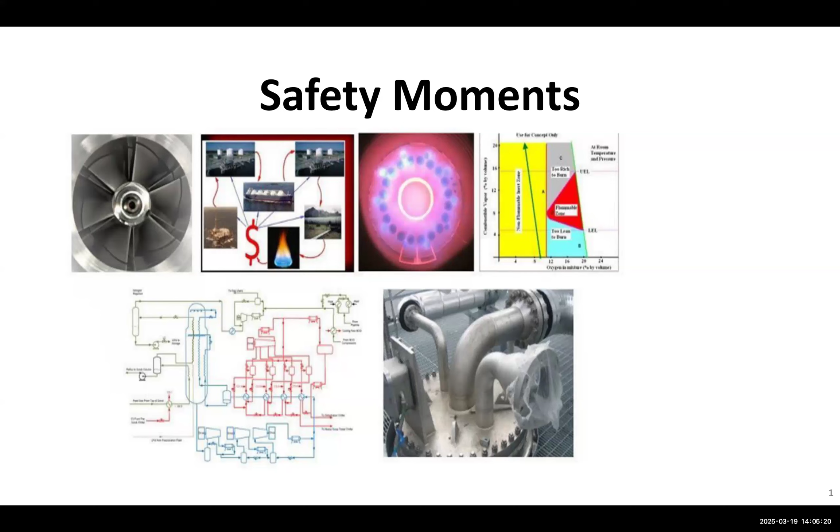But first, some of these safety moments will be strictly technical in nature, not necessarily an actual accident. Let's start off talking about ruptures.

Gas pipeline ruptures - if you look over here, you see a gas pipeline rupture that occurred in San Bruno, California. You see what happened: the pipe actually ripped apart. It didn't puncture a hole, it ripped apart and blew out of the ground. Here's another rupture that occurred in Milford, Pennsylvania - in fact, I was living in Milford at the time this occurred. If you notice, what's unique about both of these is that there's a piece of pipe missing. So what happens in a rupture is that the pipe blows out of the ground, literally ruptures to the point where there's a section of pipe missing, and you have gas flowing into the break from 2 different locations.

Now, remember when I told you about not engaging the brain before your actions? One of the things I forgot to tell you is what I did early on. Right after those two accidents happened, I came across a location where a gas main was ripped out of the ground. It was only 2 inches in diameter, and the gas was blowing. I jumped into the opening, wrapped a rag around a stick, and stuffed the stick into the pipe. Immediately, the gas pressure built up behind the stick, and the rag, the stick, and myself got thrown across the trench. I climbed out. Now, this is where I say engage the brain before taking your foot off the clutch - before I jumped into that trench, there was nobody in the trench.

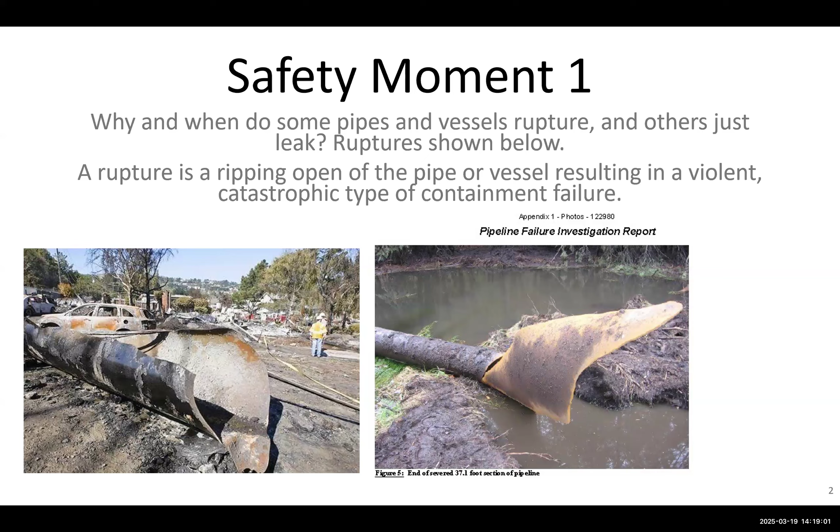So does the PIR, the potential impact radius, really define the area of consequence? No, and here's why. You know what I forgot to do? I forgot to set my timer, so I'm going to have to keep moving along—I just set it now. So what's happened is the potential impact radius is going to be

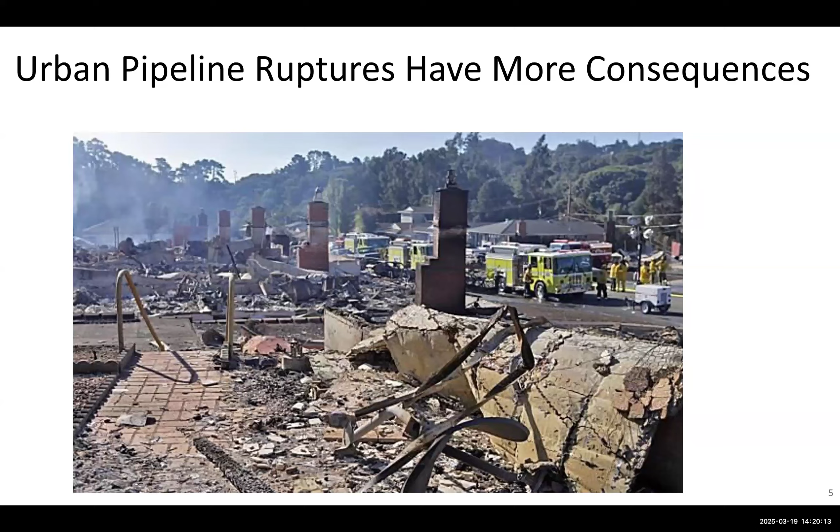Well, let's move on. This is what happens in an urban area, and this is what happened in the San Bruno area. Next, I'm going to look at stratification.

I don't know why it's not showing here—this slide is not showing properly. There it is, okay. Safety moment number two is stratification. What is stratification? Stratification is when layers of LNG lay on top of each other. Like here, you see a layer of LNG.

This is heavy LNG. Typically when I ask a class, where would you put heavy LNG if you had a dense LNG come into your plant and you need to store it, and you have light LNG in your tank, maybe 75% of the time students or learners will say you put it on the bottom—you always put the heavy stuff on the bottom. Just the opposite: put the heavy stuff on top.

Why? So that the heavy LNG mixes through the light LNG, and then you have a homogeneous mixture. If you put heavy LNG on the bottom, let's take a look at what happens: it stays on the bottom. And what's so bad about that? Well, it stays and it circulates within itself like this.

Why does it circulate like this? You have heat coming in, which makes it light and buoyant—it goes up and goes around, but it can't push through this very light layer of LNG. So what happens as it stays and circulates in here? There's no cooling taking place, so it gets hotter and hotter and hotter.

What happens to the top layer? Well, it evaporates on top, so it stays cold at its very cold temperature. Let's say this is minus 256 degrees Fahrenheit, and the bottom layer goes from minus 256, minus 254, minus 250, minus 248, minus 246. What's happening as it's getting warmer? It's expanding. And what's happening to its density? It's getting less and less—so the bottom layer is getting less and less dense.

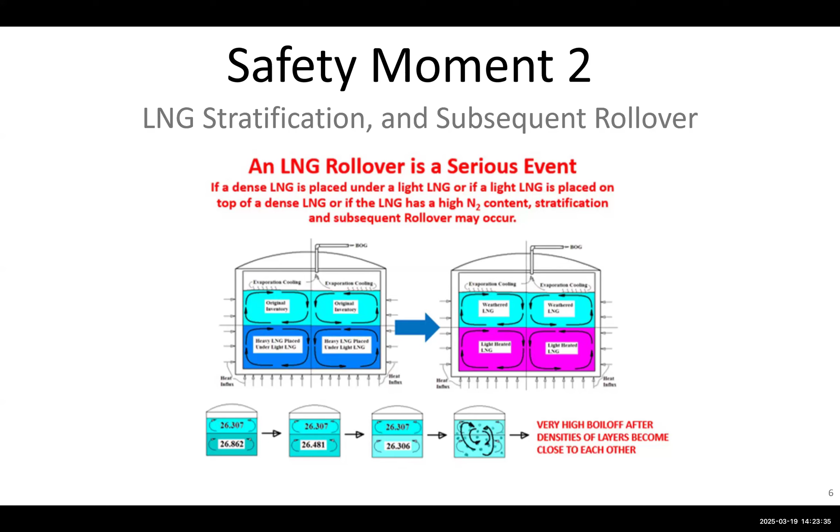Why does LNG stratify? There's two basic reasons. One is fill-induced stratification, as I just showed you - we put a heavy LNG under a light LNG. The same could happen if you put a light LNG on top of a heavy LNG. Another mechanism, which we won't have time to really discuss, is that nitrogen can cause LNG to auto-stratify. There's another form where the bottom layer is due to fill induced, but that layer has nitrogen, and all of a sudden it starts boiling before it even gets lighter than the top layer. Think about it - if it starts boiling, it's got bubbles inside of it. It's going to puncture through that top layer and start a rollover.

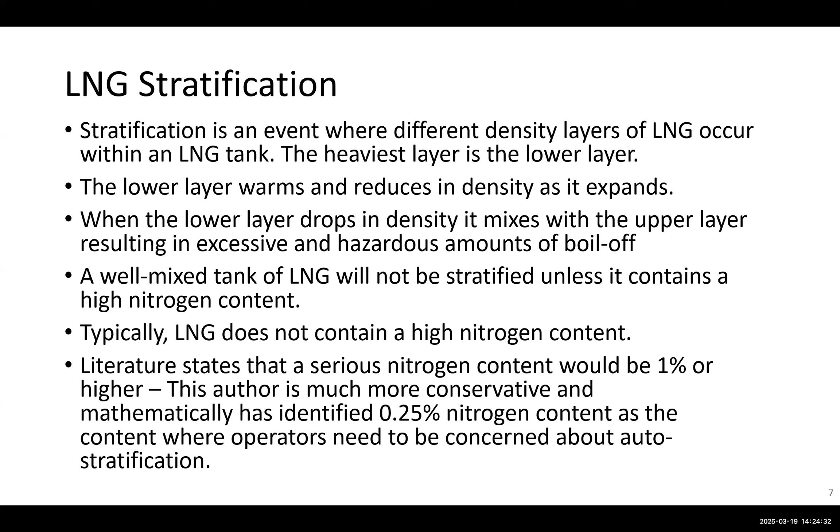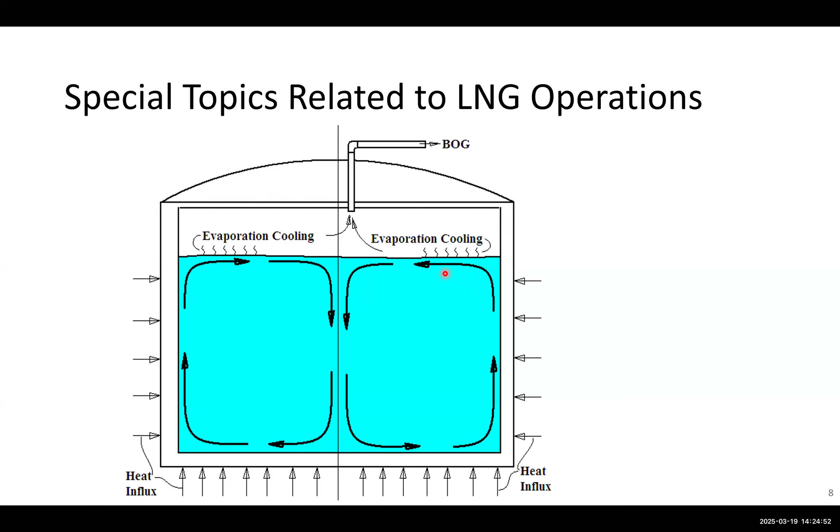So I was called out to a location where the plant had a rollover condition. This plant happened to at the time have 5 tanks, and they couldn't understand what happened. The relief valves vented, and they called me, and I looked at the temperature and density profiles, and I was able to say, yep, here's what happened. You had a rollover. Now, what happened there in that particular case is the superintendent knew that he had a stratification, so he pumped out the bottom layer, and that's how you get rid of a stratification.

You pump out the bottom layer to the top of another tank. This way it goes through, assuming that the density of that other tank is lighter than this bottom layer, it goes through that top layer and it mixes. But this plant had been so much in a mindset - you always bottom fill, because bottom fill produces less boil off. You always bottom fill. So he took the heavy layer from one tank and put it underneath another tank. All he did was transfer the stratification from one tank to another, and immediately thereafter, they had the rollover.

The next safety moment we're going to talk about is LNG tanks or pipes can BLEVE. Now, when we think about BLEVE, we typically think about a propane tank and a fire, because that's the most typical type of BLEVE. What happens in that case: a propane tank may be on fire, and this upper portion of the tank gets heated by the fire. The bottom portion doesn't get heated because it has liquid in it, so the liquid is drawing that heat away very quickly. The top of it goes above 800 degrees Fahrenheit, becomes weakened, eventually blows out, and all of this high pressure liquid that's at saturation temperature, because it's boiling, now blows out of here and atomizes into a big vapor cloud.

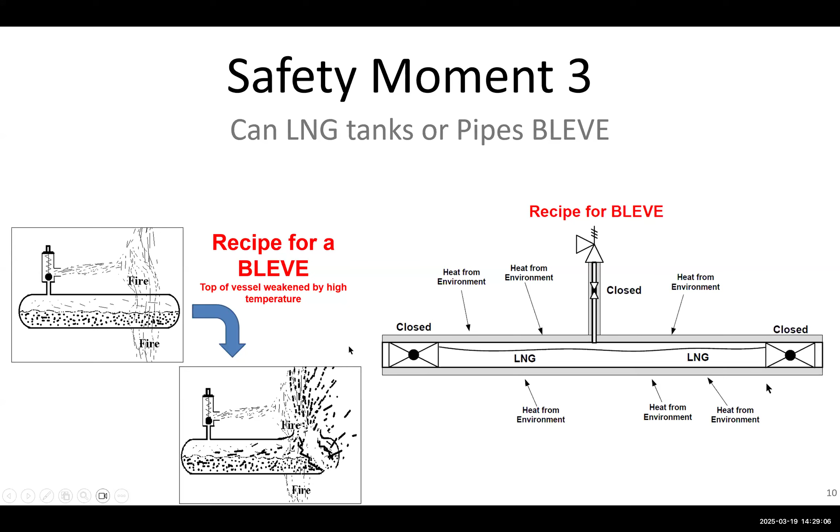Typically, just the BLEVE itself, before any secondary explosion, has enough power to rip out piping and other equipment at the plant. And what would happen is, if this is a flammable liquid, which LNG is, it would take out electrical connections, etc., which becomes a source of ignition, and then you end up with a BLEVE—boiling liquid expanding vapor explosion is what it's called.

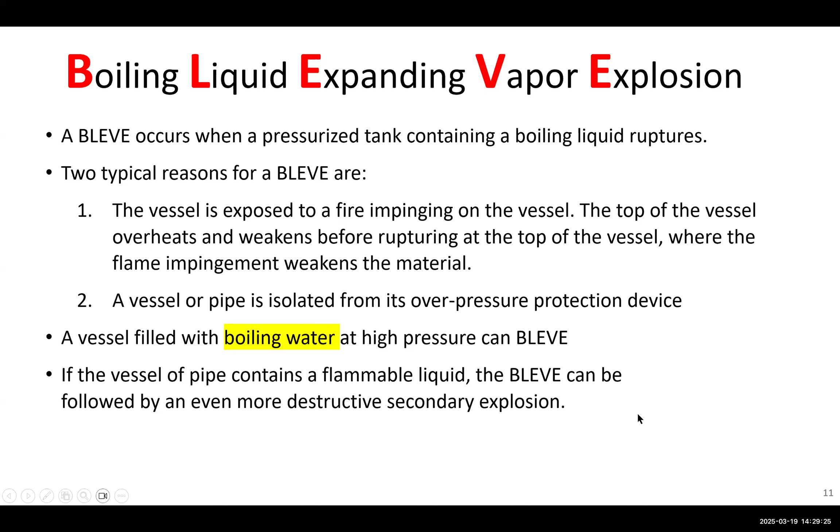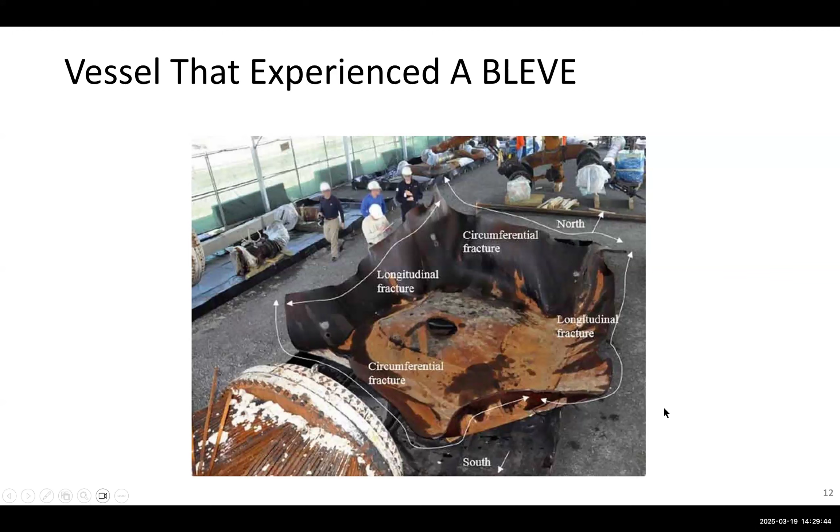A steam vessel can BLEVE, but a steam vessel does not have a secondary explosion. That doesn't mean it can't be a violent explosion—it can be a violent explosion, but it's even more violent when you have a hydrocarbon in that vessel. This is a picture of a vessel that BLEVE'd. This was a reboiler, and you can see here the reboiler tubes. This was the outer shell of that reboiler, and it's shown in the next safety moment even more vividly. But this is a vessel that was once circular that BLEVE'd—it ripped apart.

Characteristics of a BLEVE: rapid pressure release. It can produce a shock wave. And the secondary fireball, if it happens to be a flammable liquid that's in the container, can also have a shock wave—may or may not have a shock wave, depending upon the conditions of the material that's exploding. Flying debris is another thing—flying debris certainly rips out many parts of other pieces of equipment or other fuel-carrying piping, etc. So flying debris is a major concern.

In fact, when I talked about rupture earlier, I didn't mention one of the things not taken into account in the calculations of the heat transfer or the hazard: the amount of earth and debris that gets blown out of an opening. The initial blast of a pipeline rupture has four times the amount of gas flow than the final steady-state blowing, because in the final steady state, all the pressure is down and it's just being fed by the pipeline's continuous flow of gas. But that initial pressure energy is not counted as part of the hazard associated with it.

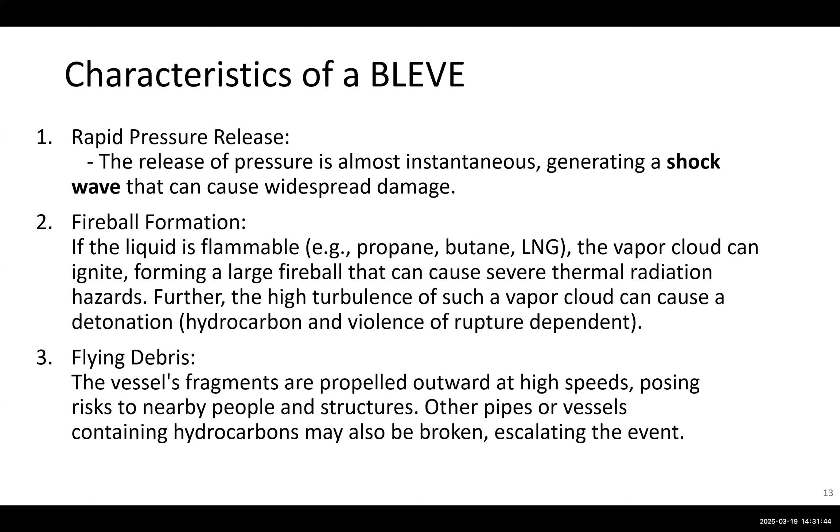In fact, one of the ruptures that occurred in Edison, New Jersey, blew a crater in the ground. Think about the numbers: 140 feet long by 65 feet wide by 14 feet deep. Think of the amount of earth, rock, asphalt, and everything else that was blown out of that opening. That's very significant. So with a BLEVE, you also get a lot of shrapnel associated with it. Many times, shrapnel will be found a quarter mile to a half mile away from the BLEVE, because it has that much energy.

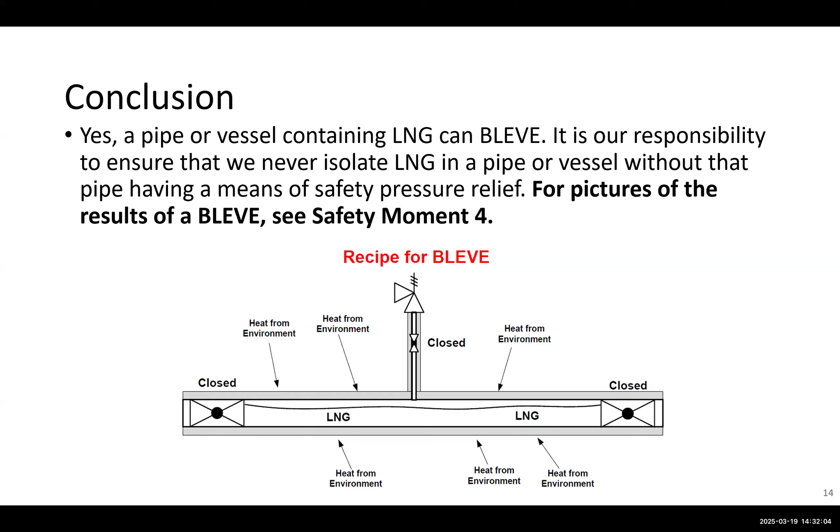Conclusion: yes, pipes and LNG vessels can BLEVE. They typically don't, because of administrative controls, such as making sure that relief valves are always on piping and that the vessels are always protected.

Safety moment number 4 is a culture of safety, safety culture. Many times you'll go into certain plants and you'll find they're not inhabiting a culture of safety. One of the things that the CSB, Chemical Safety Board, did was make a video. It's 55 minutes and it is worth your time to review it. It's called The Anatomy of a Disaster; I called it Anatomy of an Accident.

Prior to making this video, many of the same things that they identified, I had identified in my training, which I called Anatomy of an Accident. In this case, they called it Anatomy of a Disaster. Very worthwhile seeing it—it's 55 minutes. In that video, Professor Trevor Kletz stated, if you think safety is expensive, try an accident.

Accidents cost a lot of money, not only in damage to plants and claims for injuries, but also in the loss of your company's reputation.

I know of one plant that was completely built. It was an import terminal, an LNG import terminal. Their commissioning cargo was en route to that location. Three miles away from it, a year earlier, an LNG plant had a collapse of the roof and a fire inside while men worked inside. Forty people were killed. That plant was totally shut down, and it was dismantled.

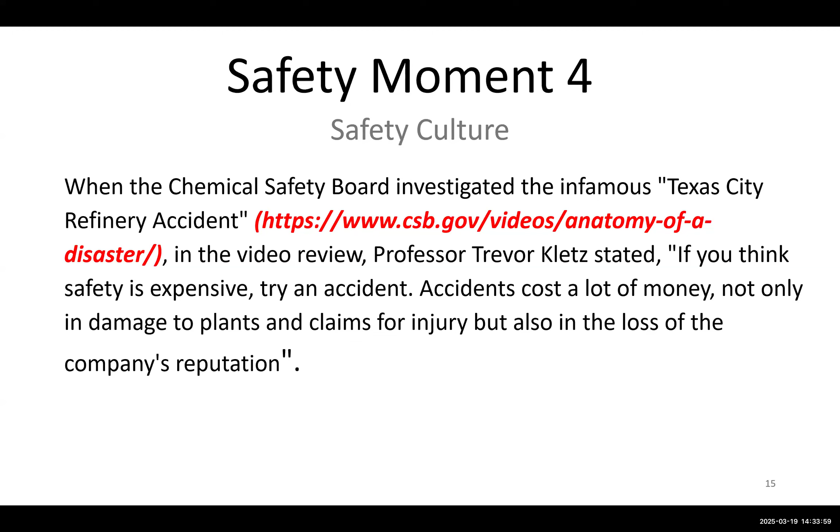But the plant that was being built, on the very week of commissioning, because the commissioning cargo was en route, their operating permit got pulled. Those tanks—I live about a mile from those tanks—never saw a drop of LNG. There were two full containment tanks.

Now, a lack of safety culture. In October 2016, a reboiler exploded in Baton Rouge, Louisiana. The accident investigation report concluded that process safety management program deficiencies at the facility during the 12 years leading to the incident allowed this heat exchanger, called a reboiler, to be unprotected and overpressurized, ultimately rupturing. The CSB investigation revealed a poor process safety culture. That was the key thing they found here.

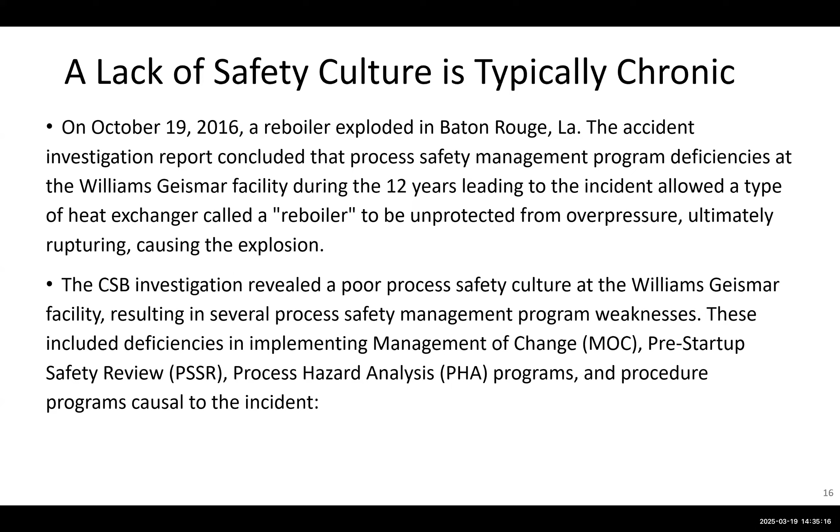Lack of management of change, lack of pre-startup safety reviews, lack of process hazard analysis, lack of procedure programs—they were very casual about how they operated the plant. The end result was a number of people being killed, and I'm looking for the number. I don't know—this isn't the one where people were killed. There's another one I'll mention where 16 people were killed. I don't think anyone was killed in this accident, but you can see the results of it.

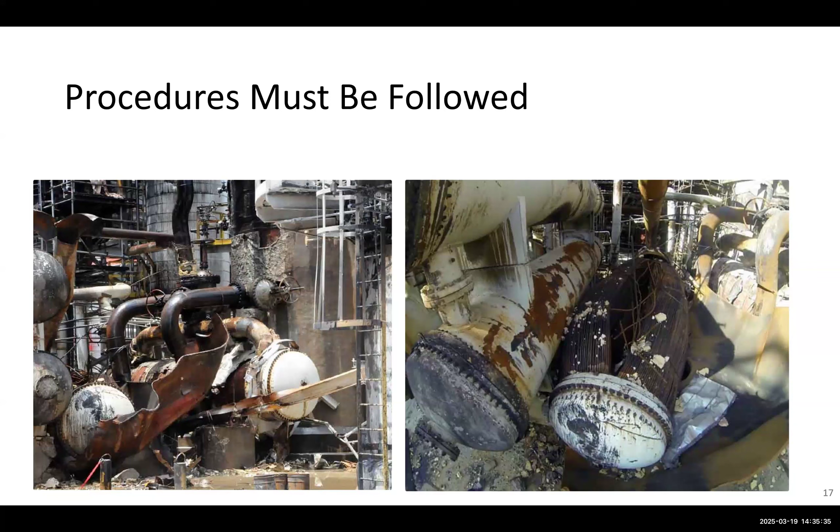You see the reboiler—this was the plate of steel you were looking at earlier that was brought inside, and this is the reboiler itself. What happened is they allowed heat to enter this reboiler. It contained propane, and the relief valve had been blocked, and the end result was this BLEVE. But the issue here was really the culture, and that's the key thing I bring up.

And I conclude this very strangely. Back in the 1600s, Elizabeth Barrett Browning wrote a poem, 'How do I love thee? Let me count the ways.' What a strange way to end a safety moment. Well, each of us—myself, yourself, your fellow employees, your coworkers, the citizens that live outside your plant—they all have someone that loves them or that they love. Everyone deserves to come home safe at the end of their shift. That's putting it in a nutshell.

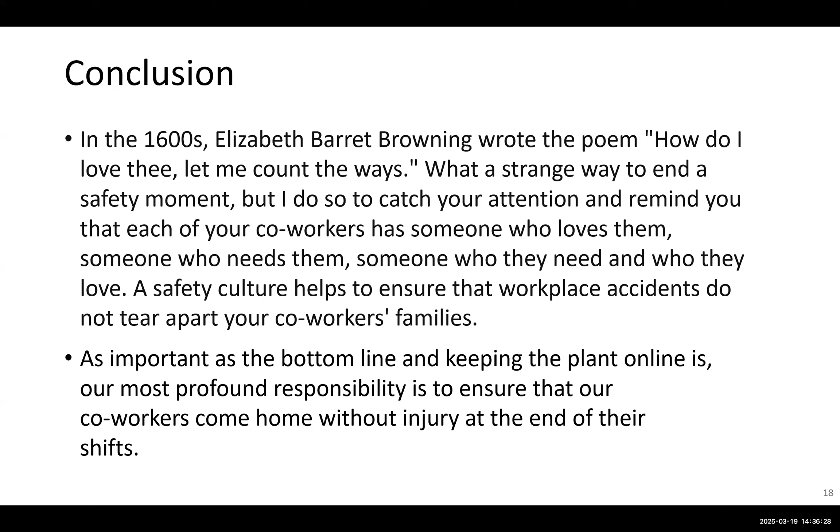And I've seen many times where I've visited people who are injured on the job and are permanently disabled. I see not only the worker injured, but the entire family has been injured.

Next, we're going to talk about the difference between deflagration and detonation. You've probably heard the word deflagration many times. Deflagration is a slow-moving flame front. Often in testing, they'll pour LNG into a pool, and someone from far away will go with a torch and light the vapor cloud, and that flame will move slowly to the pool of LNG and just continuously burn. That's called deflagration—a slow moving flame front.

Detonation, on the other hand—you've probably seen in war movies, looking down from the plane bombardier's sight, you see bombs hitting the ground. As the bomb hits, there's an explosion, but then there's a pressure wave that ripples out far away from the explosion, rippling all the way around it. That's a pressure wave, and that pressure wave is what's associated with a detonation.

A pressure wave can kill people much more so than a deflagration, because with deflagration you only have to worry about the heat. But detonation has this pressure wave that goes way beyond the heat zone of the fire. So if you look at it, 1 psi overpressure is what it's called.

Think about your body—let's say you're 72 inches high and 20 inches wide. That's 1,440 square inches being hit by a 1 pound force. That's 1,440 pounds pushing against your body instantaneously. That can cause lung damage, possibly fatal injuries, internal organ destruction, break windows, etc.

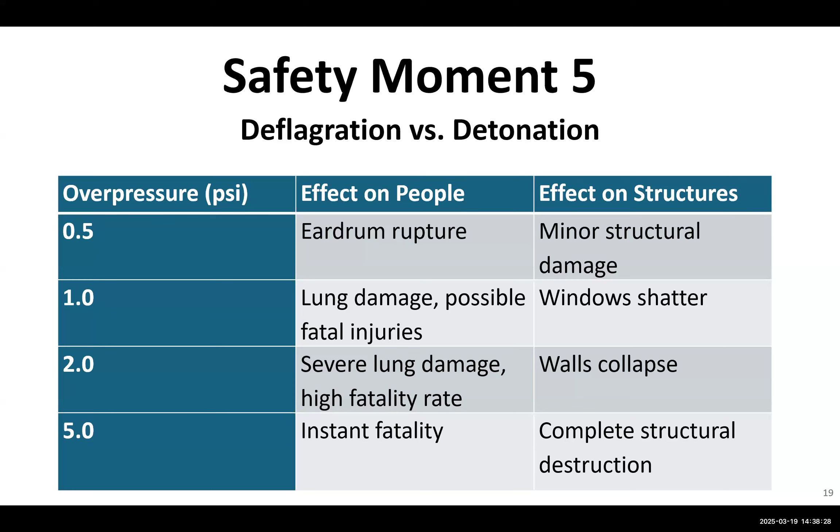At 2 psi, you have significant probability of death. At 5 psi, it's instantly fatal, with complete destruction of buildings. Contrary to many beliefs, although unusual, vapor from LNG can detonate if it's very turbulent.

I did my PhD dissertation on turbulent flows of natural gas inside engines, inside natural gas engine cylinders. If you provide enough turbulence in swirl and enough turbulence in tumble, then you can actually control the temperature and the emissions associated with that flame by increasing its turbulence.

If the flame front is extremely turbulent, you can also end up with detonation, a transition from deflagration to detonation. How does that occur? Let's say you're in a crowded pipe rack and you have a gas leak and it starts to deflagrate. As that flame moves faster and faster through the pipe rack, going around piping, it gets turbulent enough where the flame front becomes supersonic. Once you've got a supersonic flame front, you have a supersonic shock wave ahead of it, and that's where you end up with deflagration leading to detonation.

Preventing air fuel mixtures from occurring where they are not intended, that's our job. Where are they intended? Inside boilers, inside process equipment where we expect to have flames, but not in the environment of the plant proper. Preventing a BLEVE of a boiling hydrocarbon is critically important in any petrochemical plant.

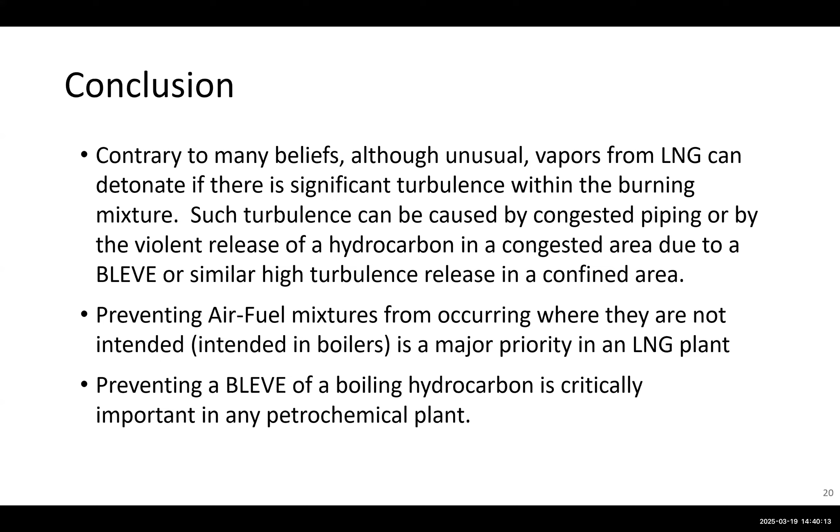Safety moment number 6: do not peel back the layers of protection. What I mean here is that everything has layers of protection when designed.

Take, for instance, your LNG tank. What if we get a leak in the LNG tank? One layer of protection is you have sensors on your tank that will warn the operator and he can take certain actions. But you're using 9% nickel steel, that's a layer of protection so that your tank can withstand that cold temperature and not crack and not become brittle. Another layer of protection is you have a dike around it. That provides, if you do have a leak, that the leak doesn't run down the street into the sewers like it did in 1944 in the Cleveland LNG spill.

Another layer of protection is you might have insulated concrete on the dike area so that if there is a spill, it produces much less boil off. You might have foam generators that put a layer of foam over the LNG. So these are all layers of protection, and you have to watch out not to remove layers of protection.

I remember one incident, part of this presentation somewhere in here, where layers of protection were removed, and eventually there was an explosion and two people were injured. A 4,000 psig CNG compressor exploded, injuring two employees. Layers of protection were breached over a period of time.

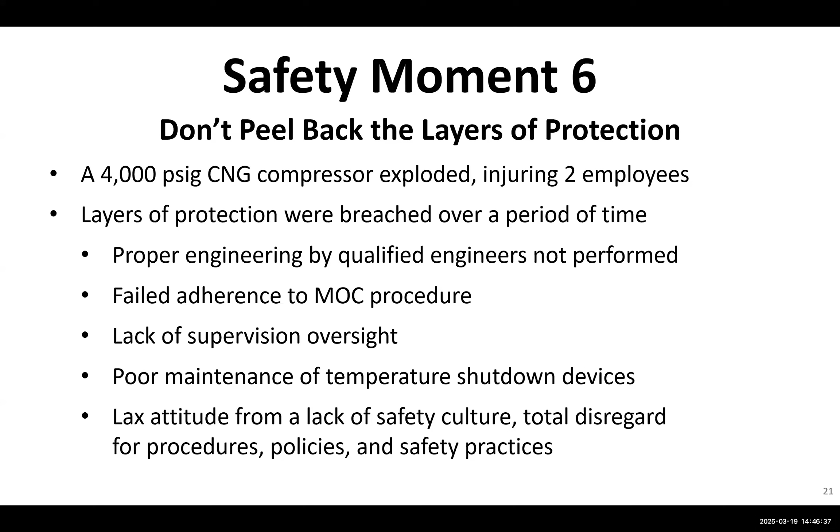The analysis showed that a failed component inside the machine caused a spark, caused a hot spot because it was metal on metal wearing, and that's what caused the explosion. It was a removal of layers of protection.

LNG on wheels - this is an interesting one because LNG has always had this big fear around it. Well, tens of thousands of trucks carry LNG every year across the United States. And you know what? They also carry gasoline and propane.

Is there a hazard of transporting LNG? Yes, there is, but it's a manageable hazard and it's an acceptable risk. It's done all the time, same as gasoline trucks, same as propane trucks. That hazard is considered acceptable, but it doesn't mean we can get lax.

The operators have to be trained, they have to be qualified, the equipment has to be inspected for being mechanically sound. In fact, when an LNG truck comes into your plant, it's your responsibility - the truck driver's too, but your responsibility - to take a walk around that truck and make sure it looks like a safe truck, which means the tires have tread, and that the air brakes look properly adjusted with the proper amount of movement.

Is the operator using chocks? Is the key taken out of the ignition while the guy is unloading or loading? Quite often what they do is put the key on a big elephant ring attached to the hose so there's no way that key can be used. But of course, people are sometimes lazy, and who stops someone from getting a second key and just using that instead of putting the elephant ring on the hose?

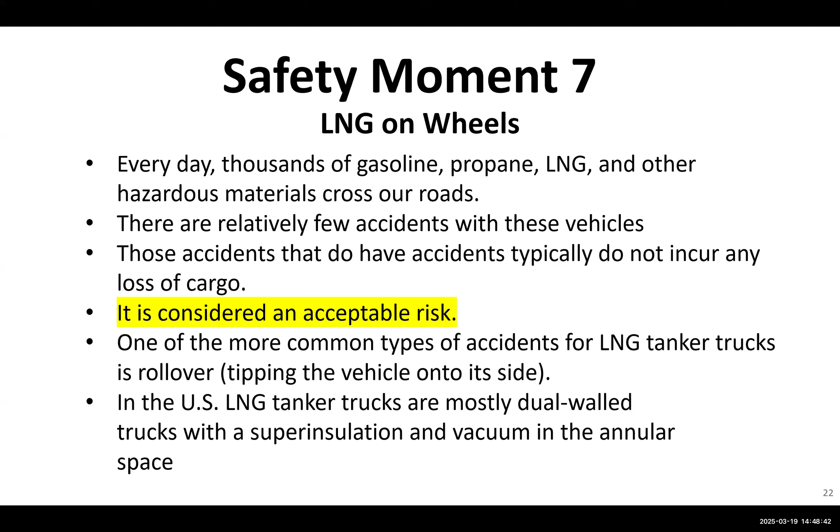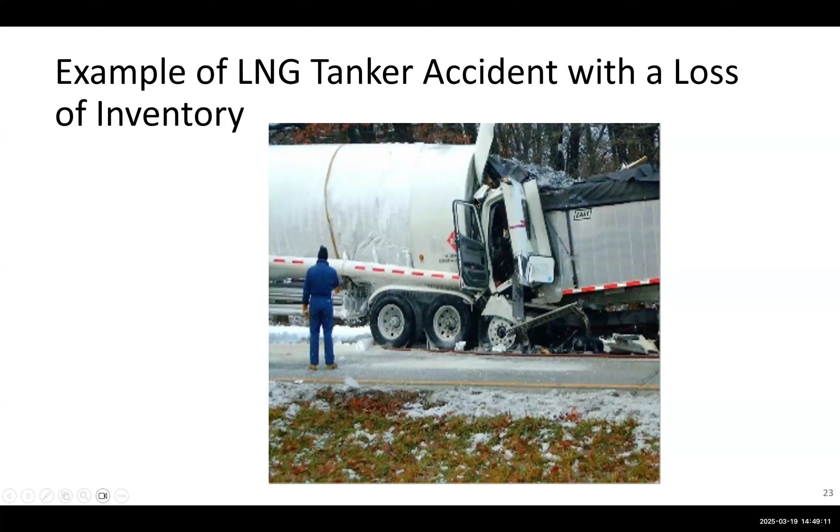Conclusion: transport of LNG, gasoline, and propane all have their unique hazards. Our job as engineers and operators is to ensure that only safe practices are employed when transporting LNG.

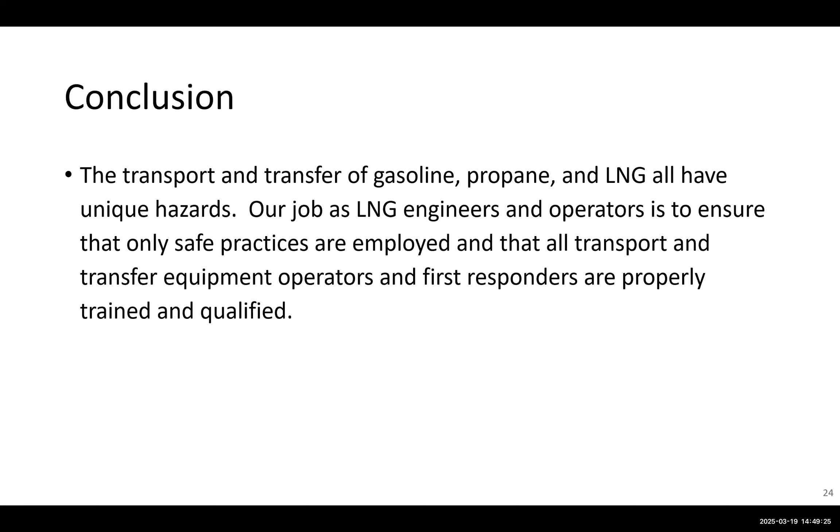How else can LNG be transported? By ship. A lot of the work I've done has been site-specific work on import and export terminals, so a lot of work can be done on ships. How much does a ship hold? Well, let's say an average ship is about 3.3 BCF, and an average large tank is also about 3.3 BCF.

How much energy is that? You can run your house heater for well over 1,000 years, 24 hours a day, and not go through a BCF. So think about that amount of energy, then times that by 3.3, and you get an idea of how much energy an LNG carrier is carrying.

How much energy is in an LNG tank? A very significant amount. In this case, I'm going to look at how good communication is essential for reliability and safety. A lightning strike - this is one of the jobs I got called out to.

I was out to dinner with my family and I got called: Steve, there's been a bad gas leak at such and such location. I left my family - it was a Saturday night - and went to the job site and took over. I became the PIC, person in charge, on the job.

A lightning strike had hit a hydrant about a mile away from this location. At this location, the energy from the lightning jumped across to a water main and blew a hole in the gas main, which was operating at 60 psi, about the size of between a dime and a nickel.

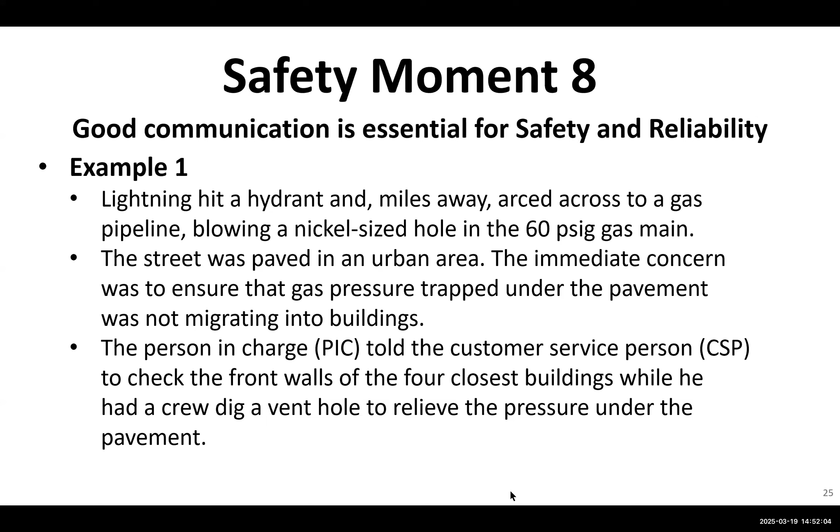As he was stepping away, I said, wait a minute, what do you mean the houses are secure? He said, well, I mean the curb valves have been shut. I said, that's not what I asked you - I asked you to check that the front walls are clear. Oh, well in his language, secure means curb valve shut. For me, secure means those buildings aren't going to explode.

We've had cases where we're outside working, jackhammering, and boom, a building explodes because gas is getting into the building. So I said, now get into the buildings. He says, I can't, nobody's home. So I said, well, we have the fire department here. I said to the fire lieutenant, we need to get into these buildings. Boom, boom, boom, boom - they open up the buildings.

The guy goes in - okay, the front walls are clear. Now do the manholes, etc. On this job, the guys were able to excavate an opening over where the gas was blowing, which now vented the gas at least to the atmosphere, so it's not pressurizing the underground. That was the important thing.

Then I had them excavate an opening about 200 feet away where we were going to install a shortstop and close the valve, between the shortstop and the valve, so we could isolate that section and repair it.

After we were able to slip a sleeve partially over the leak, it was still about 10% leaking. But after the firemen and the news media and everybody else left, the guy said, let's go in and push that sleeve on the rest of the way. I said, no, you wait. Tomorrow's Father's Day, and I want everybody to be home tomorrow - the daddy's home tomorrow, not in the hospital.

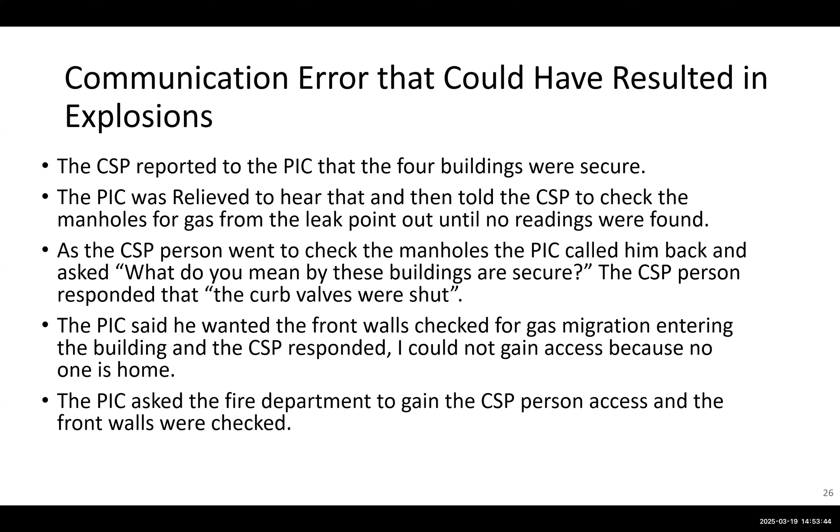We're going to wait till the opening is dug and we get the shortstop in and the valve closed, and then we can work on this main with no gas blowing. And that's exactly what we did.

Here's another communication error. It's a Sunday morning. I was chief engineer at the time, and I get this call from dispatch saying, Steve, we're going to lose part of the district. I said, what's the matter? He said, it's your LNG plant.

I was in charge at that time of 14 LNG plants, 14 propane air plants. So I called the LNG plant. I said, what's going on? Operator says to me, look, Steve, every time the dispatcher asks for more pressure, I give him more pressure, and he's complaining that he's getting less pressure. If I give him any more pressure, I'm going to blow the relief valves.

I said, where are you reading this pressure? He says, on the outlet of my pumps. I said, which valve are you closing? He said, the inlet to the vaporizer. So the pressure is building up between the pump and the vaporizer, and what he's doing is pushing the pumps into recycle. I said, that's not where he needs the pressure, he needs it outside the plant.

He says, well, I'm having another problem. I said, what's that? He says, I have 4 vaporizers on their minimum flow, and they were all fluctuating up and down. I said, well, how do you have them set? He said, on automatic. I said, put your vaporizers on manual. Start opening up the valve between the pump and the vaporizer, start flowing through the vaporizers. Bring up each vaporizer on manual and leave the last one on automatic.

All of a sudden, the pressure on the outlet of the plant rose. The district was saved. The pressure on the outlet of the pump started to drop the way it should, and the day was saved. I was 300 miles away from that plant. It was a Sunday afternoon. Where do you think I was at 9 o'clock the next morning?

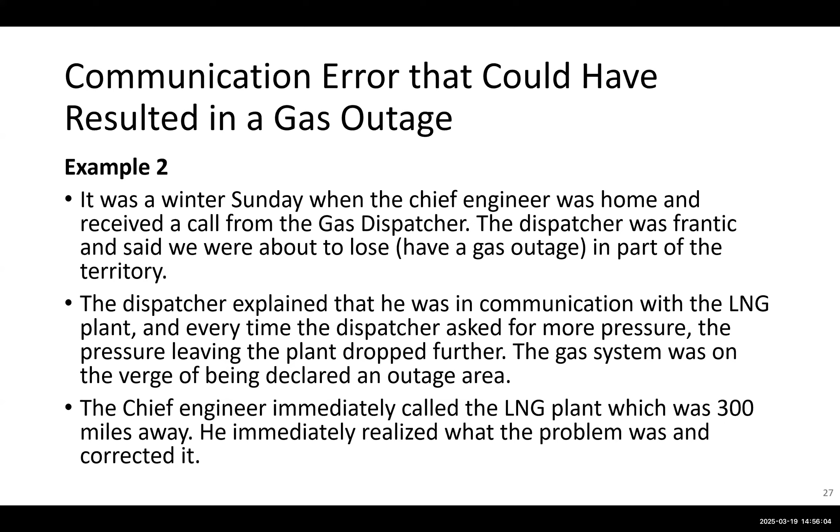The problem was communication. When the dispatcher said I need more pressure, the LNG plant operator never understood he means outside the plant, not at the pump. The chief engineer quickly understood what the problem was—no credit to me, I mean, it was common sense. What we were missing was a lack of cross training so that the communication has to mean the same thing.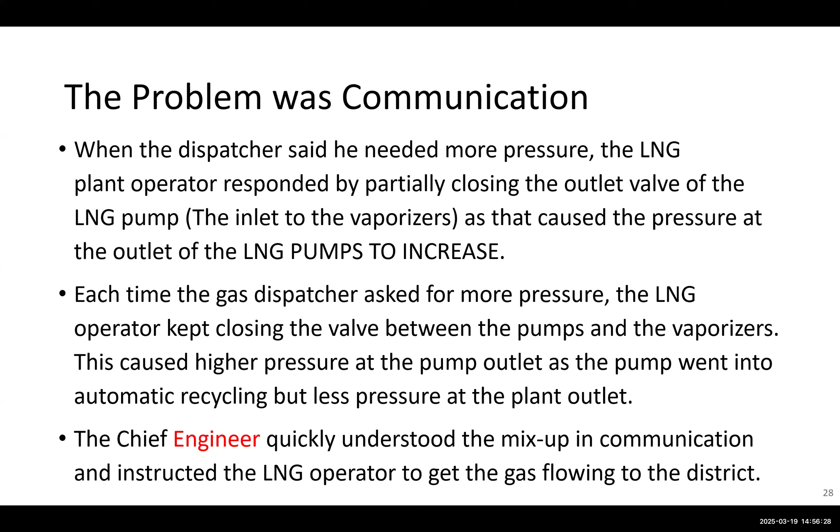Be careful when you're dealing with people from other cultures, other continents. They quite often have a different understanding of word meaning than you might have, and a different culture. Like in some cultures, it's considered rude and improper to say no, so they might say, well, that's not as I think it would be, which means no in that culture. So you have to be careful about understanding what's being said, and if you think there's any doubt, you have to dig further.

You need to have technical knowledge—everyone in the plant must be technically knowledgeable of what is going on. You need QA and QC. QA is training, QC is testing. It is a good practice to go around to your plant and ask questions.

I went to one plant and was doing an audit, and I went up to the top of the tanks and saw 3 Enrafs that were broken. In all 3, the person had closed the valve before retrieving the tape upward and pinched the tape. I said to him, how are you operating without your Enrafs? He said, oh, we use the pressure at the bottom of the tank to determine the level.

I said, okay, do you take into account the density of the LNG? The person looked at me, the density, what's that? So they obviously were not taking into account the density. You could have a density anywhere from 26 point something up to 29 pounds per cubic foot of LNG, which is certainly going to change the pressure that you're reading.

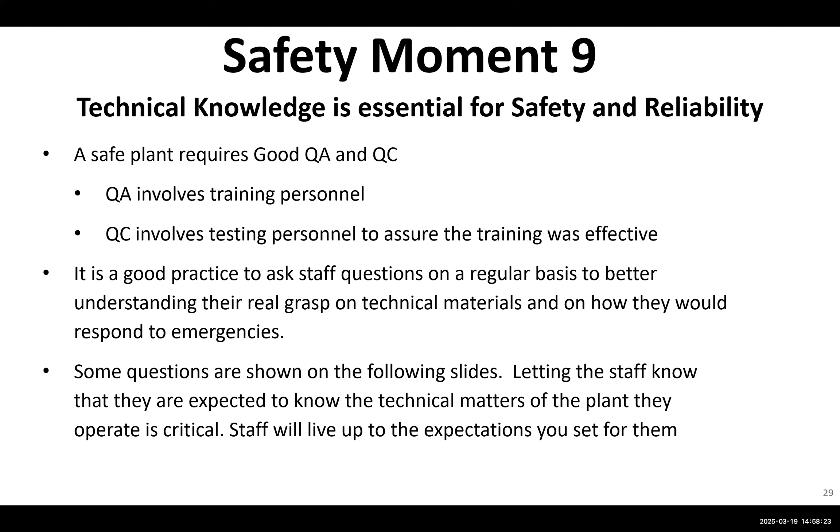I'm sure after my audit they got them repaired. Some of the questions might be as shown in the following. I'll go around and ask. So let me ask you a question: a recondenser uses subcooled LNG to cool and then condense the superheated

boil-off gas, lessening the need for pipeline compressor use. Is that true or false? It's the kind of question I would ask an LNG operator at a plant that has vaporization or has a recondenser. A recondenser can only be used when vaporizing.

LNG pump cans must be supplied with what type of LNG and NPSH? Subcooled LNG, positive NPSH. What are some reasons for rising tank pressure? There are many, many reasons the operator can give you. You start the top load of a tank, to top fill a tank, and the pressure all of a sudden drops, and you have to stop loading the tank.

What's going on? I'm putting stuff into the tank, why is the pressure dropping? Well, if the vapor space is warm and the LNG is cold, it's going to make the vapor cold and contract, and the pressure is going to go down. So you have to pre-cool the tank before you do a top fill.

A hurricane is coming tomorrow. What do you, as a prudent operator, need to do today because the hurricane's coming in tomorrow? Bring the pressure of the tank down.

New production contains 1% nitrogen in your LNG. What concerns might that LNG operator have to consider before taking on this new LNG inventory? Certainly what we spoke about earlier is nitrogen stratification, but also boil off. We'll talk about that momentarily. Your boil off may flash to where you're getting a very high percentage of boil off.

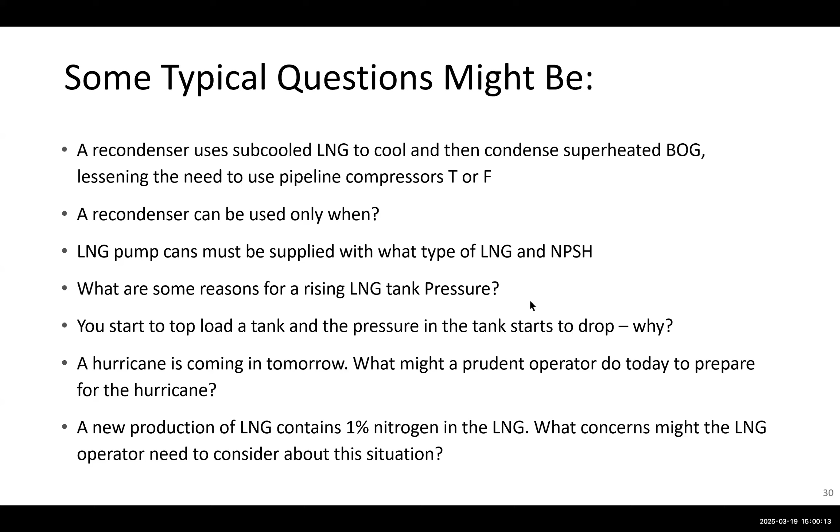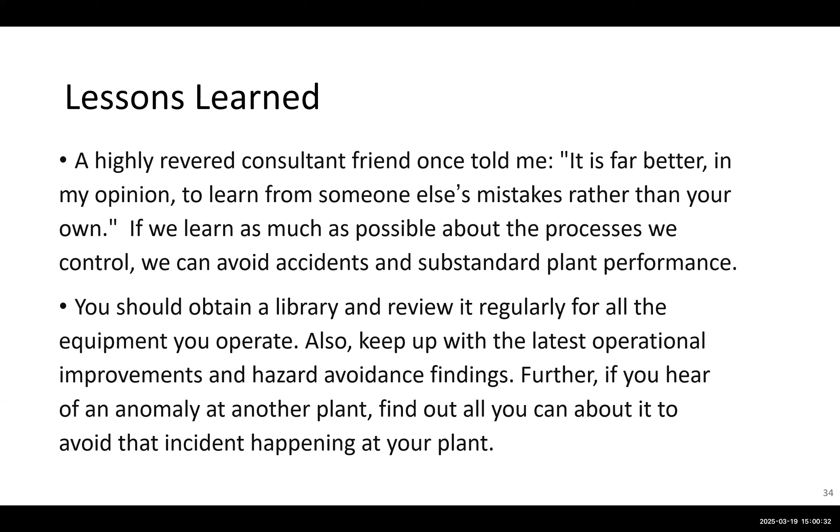And there we go. Okay, lessons learned. A highly revered consultant said to me at one time, it's far better, in my opinion, to learn from somebody else's mistakes than from your own. And you can certainly see why. We have to move along because the clock is ticking faster than I'm going.

Send out. Let's talk about send out. What is send out? Send out is when you take LNG, heat it up, turn it into a vapor, and send it out. That's called send out. Pipeline gas is typically 1035 BTU. Send out gas is typically 1050 to 1100 BTU.

So what about tail gas? That's all your regeneration gas that comes off your regeneration of your mole sieves, etc. Gas that comes off and has your outlet of heavy hydrocarbons dumped into it. It can be all over the map.

Tail gas - I went into one plant and walked over to the gas chromatograph and looked at the tail gas. I said, do you realize you're sending out 12% nitrogen to your district? He said, oh yeah, that typically happens when we're vaporizing. I said, well, that's in violation of the FERC requirements, and also we have therm billing here, so that's in violation of the therm billing. So we had to make some changes there.

But that's something operators say - oh, we always do it that way - and I got to be careful of that 'we always do it that way' thinking. Because 99 times there's no explosion, and on the 100th time you get an explosion.

FERC guidelines are you must be under 1110 BTU per standard cubic foot. You must be under 1400 Wobbe index, and that's a unitless number. You must be within 4% of your normal Wobbe index number, and you must have less than 4% inerts in your gas. It also has another requirement based on heavy hydrocarbons - C4+ hydrocarbons, I think, is 1.5% maximum, but you wouldn't typically have that anyway.

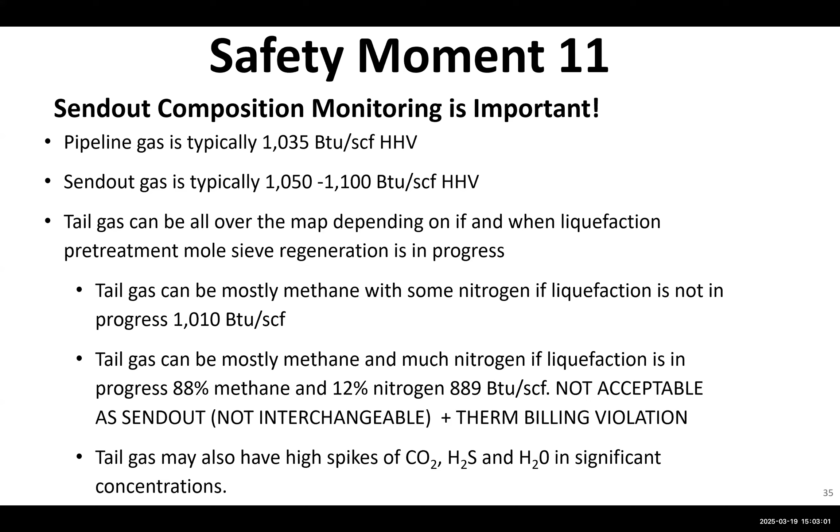In this safety moment, it's not intended to say what is right or wrong, good or bad. I do not know enough about your specific plant. If you said, well, what about my plant?

And can we add on RNG, which is renewable natural gas? You get landfill gas, etc. It really depends on very plant specific, very RNG plant specific factors. The gas you're getting out today is not the same gas you're getting out tomorrow and 10 years from now, because the garbage changes, and where you're taking the gas out of the renewable natural gas plant changes, etc.

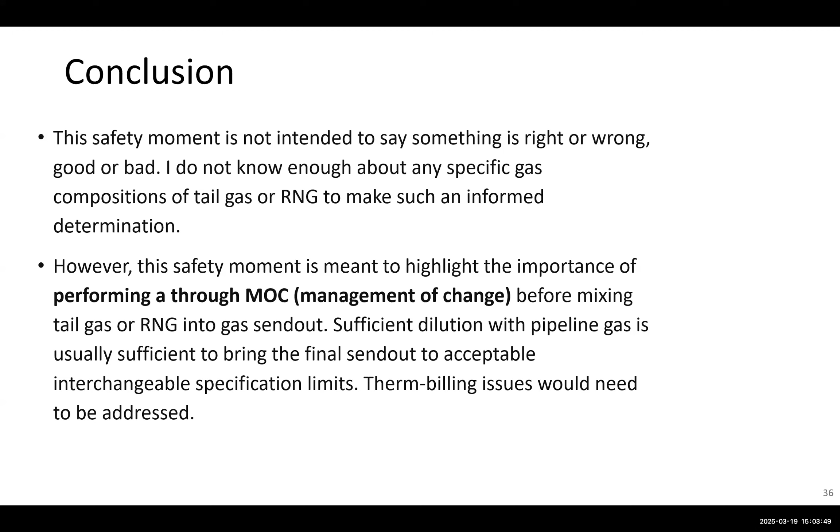You need to do an MOC anytime - that's management of change. Anytime you change anything associated with your plant operation, in particular what your feed gas is going to be. Safety moment number 12: ring out your instruments correctly.

Now, what does ring out mean? It means that if you have an instrument cluster, and let's say this is supposed to open a valve when it gets hot, you put heat here and see, does it open the valve? Or put cold here and see, does it close the valve? If you don't ring it out, you're not going to know for sure what is going to happen.

I was at a portable pipeline job, and I was going to be the consultant leading this project. The day before the job, I went out to the equipment to look it over, and I see an instrument person putting in new instrumentation. I said, what are you doing? He said, I'm putting in redundant instrumentation. I said to him, make sure you ring it out before you complete the job. He said, okay.

The next day, we were on the job. We start the LNG flowing through the vaporizer. The valve was supposed to open to allow more heat from the boiler to go into the vaporizer. Instead, it saw the cold LNG and it closed all the way down. What happened? Raw LNG went into the underground piping. The underground piping cracked because it's non-cryogenic piping.

It was operating at 80 psi. Of course, you had the whole street - we actually felt the street lift up until it blew out, and then that was the vaporizer truck and everything. You actually feel a little bit of a jolt, and then with the gas blowing, we had to now deal with a cracked gas main.

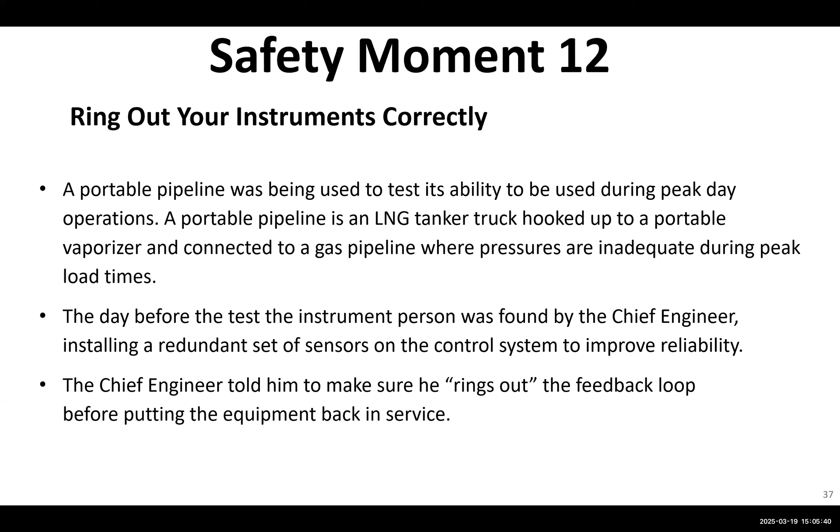But it shouldn't have happened. We should have rang it out properly. Cover gas, vacuum breakers.

If you own an LNG tank, you have cover gas, which is also called pad gas - maybe called pad gas, maybe called cover gas in your plant. And you also have vacuum breakers. Cover gas is a connection to the pipeline that basically says if your tank gets down to real low pressure, let's say 0.1 psi, it's going to start supplementing gas into your tank from the pipeline.

Well, why? Because it's dirty gas, but it's better than having the tank collapse under a vacuum. So you want to prevent that gas from that tank from collapsing. But in some plants, operators have closed the valve that goes from that pipeline to the tank, for fear that if that regulator ever fails, they're going to get this wet gas into their tank. I won't know it. How do you know?

If I go to the operator and ask him, is your valve on your back cover gas open or closed? He may not even know what I'm talking about. So you need to make sure people are aware of systems, safety systems that are never called upon, but that should be there in case of an emergency. Cover gas is one of them.

Also, you have vacuum breakers on your tank. These are relief valves that relieve inward - they take air from outside the tank and allow it to blow inside the tank. And you say, that's terrible, because now you have air inside your LNG tank. Yeah, but it's better than the tank crushing. And as you'll see in a moment, air inside of an LNG tank, unless the right mixture, cannot ignite, and there's no source of ignition.

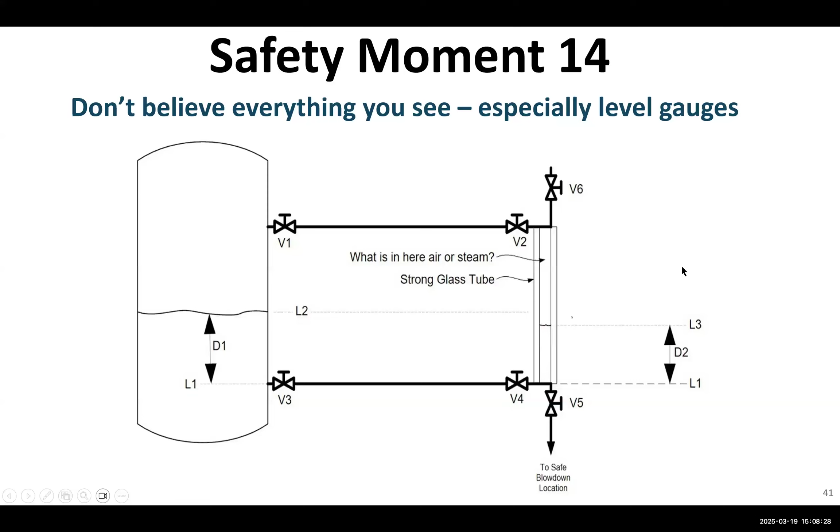So there are a number of issues that can be shown. What if there's foam on top of your layer? Now, when would you get foam? Well, let's say I'm running an amine system. Amine uses amine and water solution. Well, amine foams pretty easily - you get foam on top of it.

Now, is this reading correct? No, you're trying to read this level and you're reading it incorrect. Fortunately, most of the amine absorbers will have a sight glass on it where you can look and see if there's foam, and siphon off or skim off that foam off the top layer of the liquid.

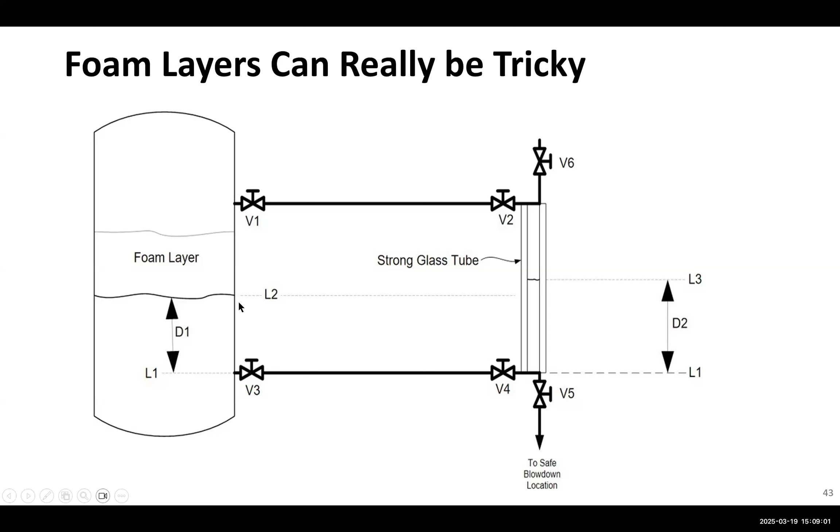Let's add some instrumentation to this. So now let's add some instrumentation, and we might think, oh, now that we're adding electronics, we're doing better. Not so, because this electronics has to be calibrated for the correct liquid and for the correct density of that liquid. And also, it's not going to get rid of this foam issue at all. So now you're adding another layer of complication, because there's electronics involved that has to be calibrated correctly.

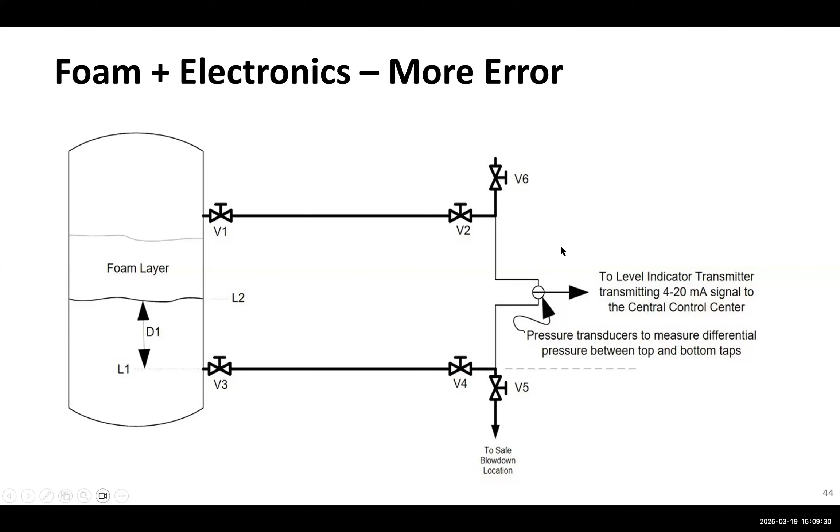Let's do a different type, one that's done most often, where you put a pressure sensor here and a pressure sensor here, and you send that differential pressure by way of a 4 to 20 milliamp signal to your control center. Again, you run the risk that these pressure transducers have to be calibrated correctly, and they have to be the correct pressure transducers for this application.

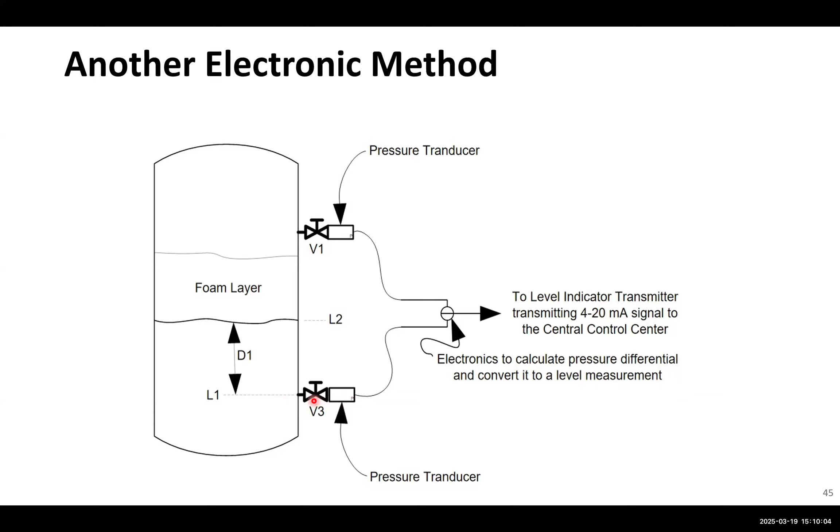You would not want to use a 1 to 3,000 psi pressure transducer on a liquid that's going to see only 6 feet of water level as a height. You use the right transducer, etc.

Let's talk about something that's very much a concern, and that is, let's say that this distance is 6 feet from here to here. And let's say that there are two calibrations you do, zero offset and span. Let's say your zero offset is off by 1 foot.

So when your level gets up to 6 foot, you're reading 5 foot. So you think you still have room. So you keep adding liquid, you still have 5 foot, keep adding liquid, still have 5 foot, keep adding liquid, still have 5 foot - now you've got 26 feet of liquid in here, but you're only reading 5 feet.

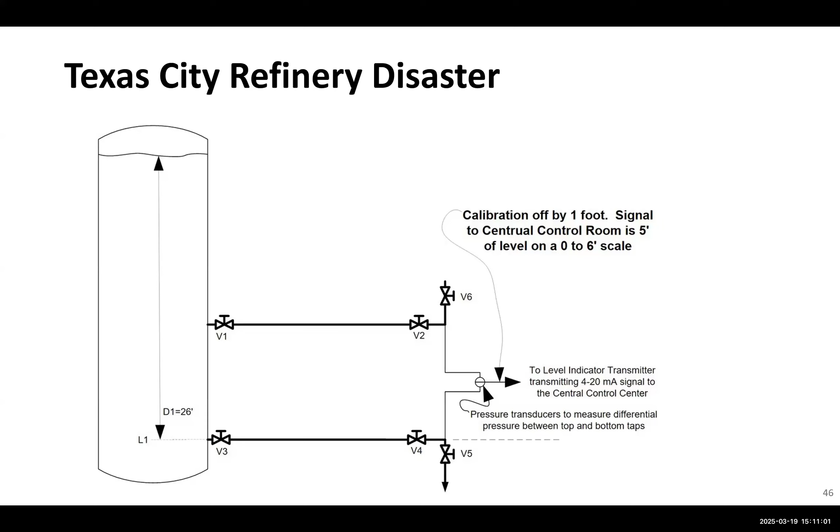So you keep adding liquid, and eventually that's what happened at the Texas City refinery, where they had a major gasoline explosion with 15 people killed and a devastating explosion that destroyed a lot of the plant. Continue on.

Safety moment number 15. Horseplay has no place in your plant. I had a pressure test being done on a 300,000 pound per hour boiler that operated at 800 psi, and that boiler was being pressure tested to about 1500 psi.

The sub foreman, who was a very good employee, took a gauge, screwed it on, and started pumping water into the boiler. He filled up the boiler with water and then started pumping water into the boiler, watching the gauge. It's not moving, watching the gauge. It's not moving. And then eventually it started moving.

When he got up to about 1,000 psi, the mud drum and the steam drum - the tubes where they entered the mud drum and where they entered the steam drum - started leaking. What happened?

Somebody spun the gauge on him. It was a prank. So when the boiler was actually seeing 2,000 psi, it was still showing zero. When it was at 3,000 psi, it was just coming off the zero peg. So it was a prank that ended up destroying the boiler and shut the plant down for a whole year.

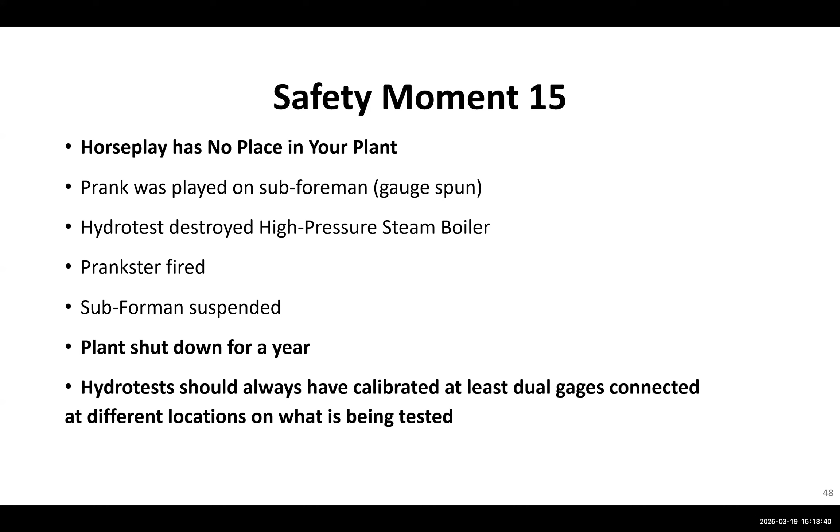Safety moment number 16, rigging and outrigging support cautions. There are two incidents I'm thinking about. One was when a cable went through a precast vault.

The rigger came and put a cable through the precast vault. The way the precast vault was made, it had two openings on the side, made by putting a 12-inch pipe across. After the casting was made, they took a welding torch and cut around the pipe, leaving a window with really sharp edges on each side of the casting—it was a manhole casting. So when the truck came, the rigger put a cable through right along the sharp edge, hooked it to the crane, and lifted it up. The truck pulled out. Before he got to let it down, boom, the cable snapped and cracked into a million pieces.

I don't know if it was a million, but certainly enough pieces to make it unusable. It took another 6 weeks before we could get another one, which pushed the job back by 6 weeks. He did not engage the brain before taking his foot off the clutch, and also did not check the rating on that cable. That was another issue.

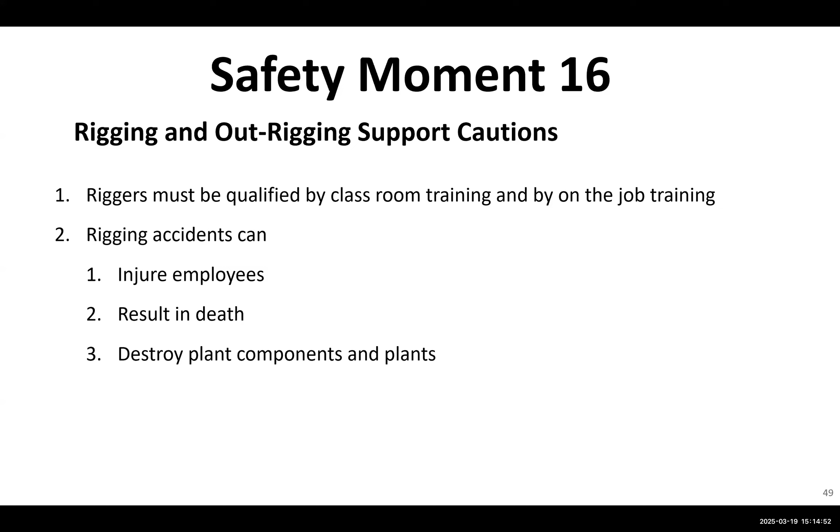Second issue that happened: we were removing an insert from a shell and tube heat exchanger. The shell is the outside, the tube is the inner part that's removed. It weighed about 10,000 pounds and was about 60 feet off the ground. The crane was hooked up to it and removed the tube bundle.

As soon as the full weight of that tube bundle got onto the crane, it tipped over, crashed into the plant, and got hung up on the structural steel. When I got out there, I looked and saw the outrigger sunk deep into the ground and hydraulic fluid on the ground. The operator said to me, 'Well, the hydraulic hose broke.' I didn't question that, but I did see that you didn't have enough dunnage, or any dunnage, underneath your outrigger. That's where the problem is.

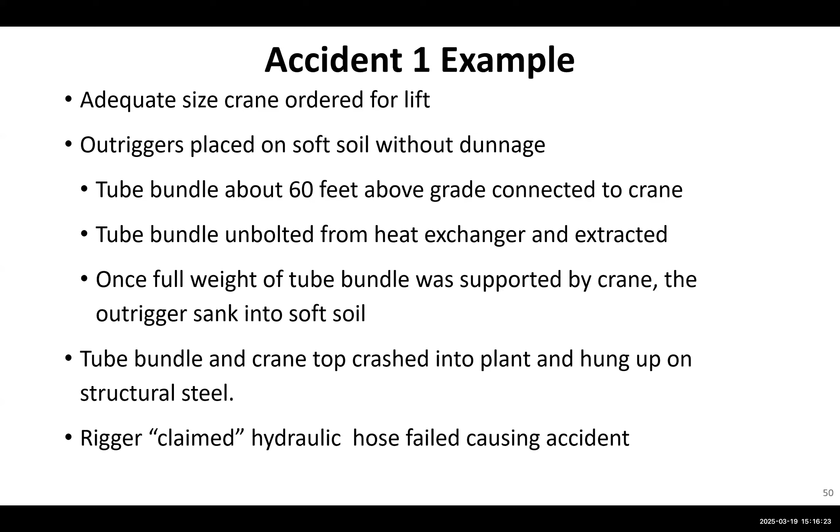When you have an outrigger, you have to make sure you have the proper amount of dunnage. Dunnage is 6x6s or 8x8s, typically 8x8s or 12x12s, pieces of lumber that go in one direction then cross in the other direction. That gives you a big footprint for your outrigger to land on. Without that, when the weight got on the outrigger, it just squished right into the soil and the crane tumbled over. This was operator error, a rigging operator's error.

Now, it's been many years after that, but I start to wonder, did the hydraulics really fail, or did the operator—who was not very trustworthy, the same one who dropped the crane—maybe somebody cut the hose? Many years after the fact, who the heck knows? But one thing that was clear: you need to put dunnage underneath your outriggers.

Hackers, cybersecurity. Hackers have gotten into the U.S. government, and actually I got this story and I asked AI to summarize it for me.

What happened is hackers got into the U.S. government, Department of Defense, Department of Treasury, Homeland Security, and other agencies, not by hacking into them directly, but by hacking into their software updates. So let's say you have Microsoft 365 and you get an update. You trust Microsoft, but if Microsoft gets hacked, you get hacked.

So you have to be aware not only that your systems can get hacked, but also that your software vendors, the agencies providing you with software, can be hacked. That's what happened in this case.

Experts determined it could take years to understand the full ramifications of this breach. This breach had occurred for many months before it was uncovered, and the reason it wasn't uncovered is they made it look like normal operation of the system.

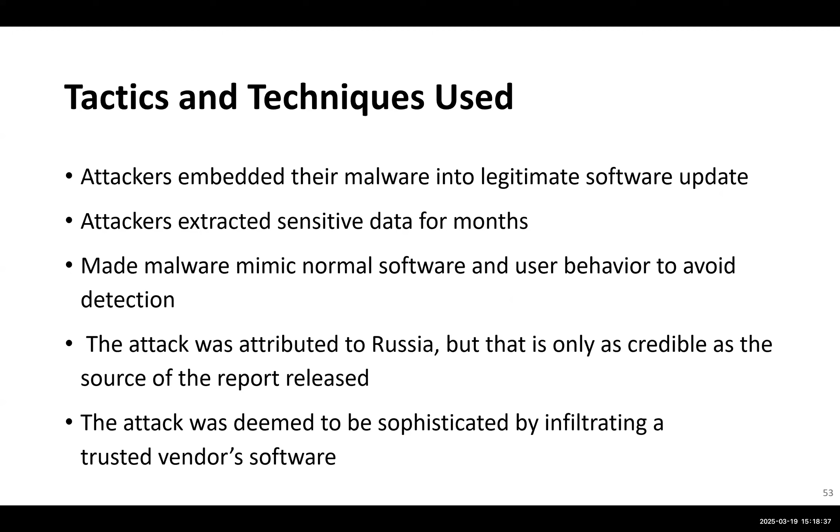This attack was attributed to Russia, but you never know who the real infiltrator was. This was deemed to be a very sophisticated infiltration of the trusted vendor's software.

Lessons learned: the need to be proactively defending your cyber systems. I do know of several companies that have had valves open and closed where they did not give the commands, but they were being controlled from outside the company.

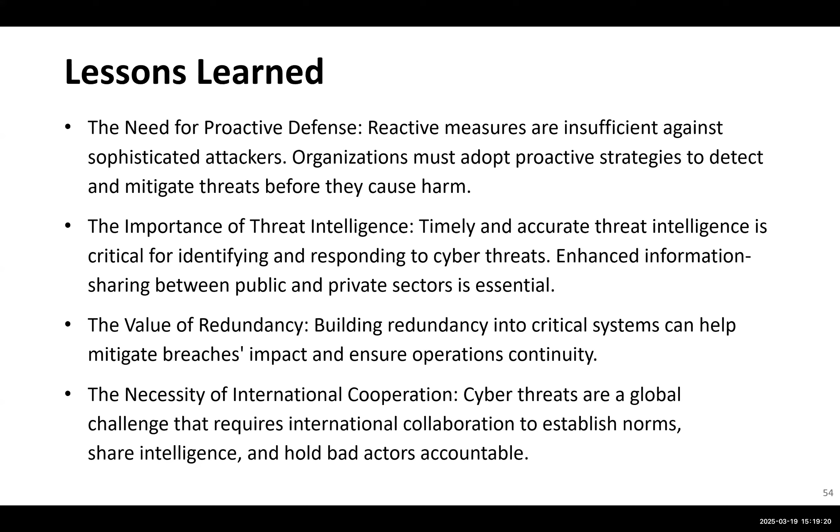I also know of an event, and you probably recall it, where gasoline was short in the southern states, and in Florida there were gas lines because of a ransomware attack. My understanding was they paid the ransom and got their system back up and running, but their infrastructure for moving gasoline from location to location was totally compromised by way of ransomware.

Safety moment number 18: Expect components to fail. I'm always expecting components to fail.

If I go to a plant and see a spring hanger at the highest point in the plant, probably at the top of a tank where the piping comes over the top, I can pretty much be sure they're not going to set up rigging or scaffolding to check if the spring hanger is still moving or frozen in place. That's an area I'd be concerned about.

I'd ask to see the records on that and who did it. I'd talk to the operator or mechanic and ask how he went about doing that. If he says he walked out there and checked it, that's not going to be true, because it's unsafe to walk out there without a harness, about 200 feet off the ground.

Or I'll see a gas detector that's way up in a location that's really hard to get to. I'd ask, when was the last time that gas detector was checked?

It would be very common for me to walk into a control center and say, okay, let's make a mock drill, this pipe has just ruptured, take all your emergency actions. They would literally roll trucks out to the location, put valve keys on, and turn the valve 10%.

I wouldn't want to shut the system down, but just make sure the valve key works, and things we find out: we weren't able to find the valve, the valve was improperly numbered with the wrong tag number normally hammered into the valve ring, or when we went to spin it, it spun freely meaning the gear's broken, or the valve was unable to move at all.

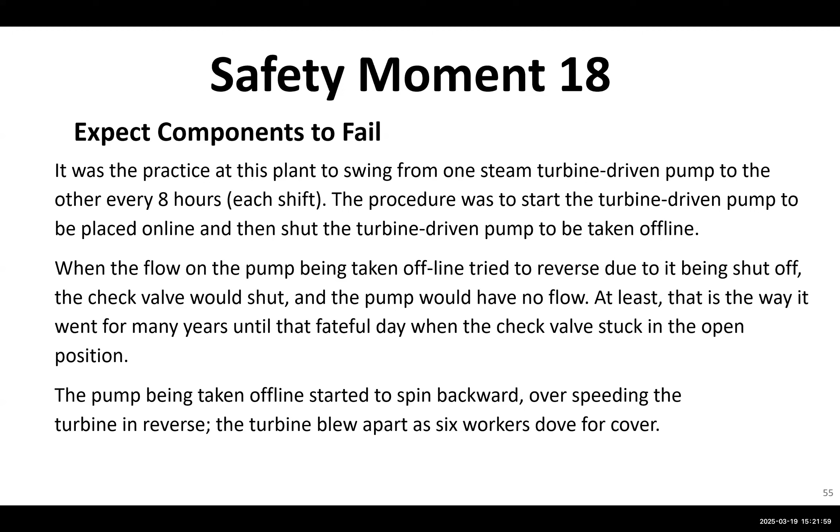It's a cold spot on tank 1. What actions are you going to take? The operators will go through their steps, things they would never think of doing. They'd rather be talking about the game than thinking about what if situations.

But those what if situations are what we have to be prepared for. I'll give you a for instance of a job. There were 2 molten carbonate pumps. The Benfield system removes CO2 from the gas stream. Molten carbonate is melted salt, kept hot. These pumps are in a very corrosive environment.

The pumps have a check valve on the outlet. The pump is driven by a steam turbine, and there are 2 steam turbines with 2 molten carbonate pumps. Typically, every shift you swing from one turbine to the other. The mode of swinging was: you shut down this turbine, the back pressure of the flow slams the check valve closed, and the next pump is put online, so that pump takes over the service.

But what happened this time is the check valve stuck in the open position. Expect these things to fail.

When they went through the HAZOP, the hazard and operability study, they asked what if the check valve fails. They put in a reverse clutch. A reverse clutch is a device that, if it sees the pump or turbine spinning backwards - say the turbine had no steam, and the pump had flow going backwards through it, which would make the pump spin the turbine backwards - this reverse clutch would lock and close and prevent that rotation.

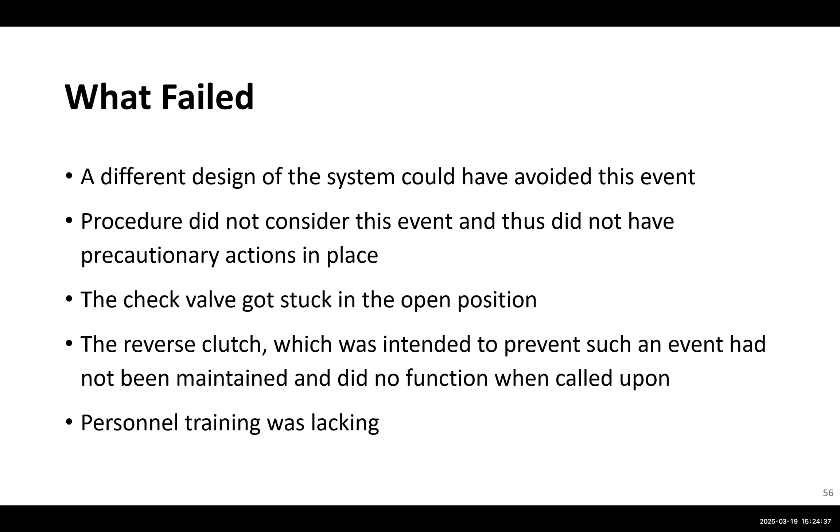What about your vacuum breaker that we spoke about earlier? When was that ever maintained? Can you tell me if it's ever been used? Can you tell me if it will operate if it's called upon? The vacuum breaker, or the pad gas, or cover gas system - I'll leave you with that question.

Lessons learned: expect components to fail. Safety moment number 19, understanding combustion. I'm looking at my time carefully - we still have a good amount of time left to finish this properly. Asphyxiation due to a lack of oxygen.

Understanding combustion: there are 3 significant hazards associated with LNG. One is asphyxiation due to lack of oxygen. It displaces air, so whatever you're breathing could be LNG vapor or could be air.

If you go into a nitrogen environment, you drop like that. Why? How do your lungs work? Your lungs are a very high surface area semi-permeable membrane. What it does is look at the 2 sides of the membrane - I say it looks, it doesn't really look, but essentially it's concentration driven.

If it sees a high concentration of oxygen molecules on one side and a low concentration on the other, the oxygen molecules go across the membrane in that direction. If it sees high concentration here and none here, the oxygen molecules go that way. So if you take a breath of pure nitrogen, it literally takes oxygen out of your bloodstream - out of your hemoglobin - because on the other side there's no oxygen at all.

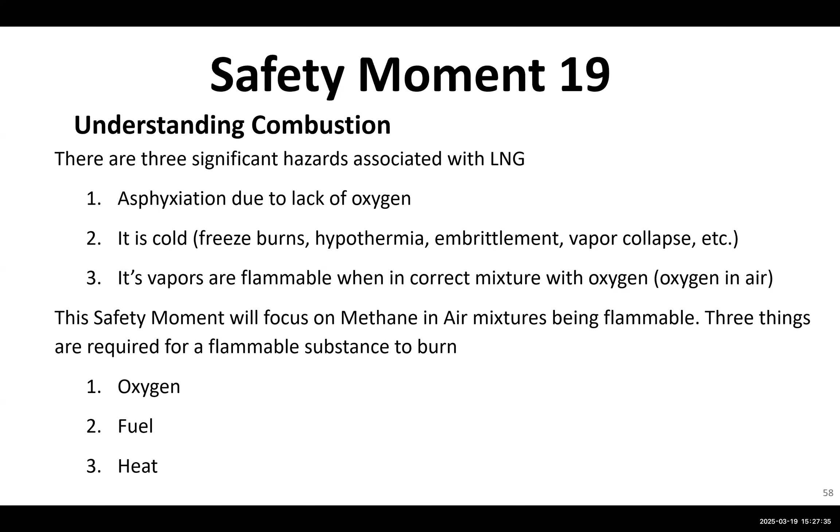Its vapors are flammable. When you have the correct mixture of air and gas—we'll talk about that correct mixture momentarily—let's understand the combustion process. Combustion occurs when you have a methane molecule, shown here with 4 hydrogens and 1 carbon in the middle. That's your methane molecule, and it reacts with 2 oxygen molecules, O2 and another O2, to produce CO2, which is a gas under atmospheric pressure and temperature, and 2H2O, 2 water molecules. It also produces heat.

Now that's combustion of this one set of molecules. If that heat is enough to get through to the next set of molecules, they'll reach their activation temperature and also combine, producing more heat, CO2, and H2O. H2O is water vapor—you've seen when you start your car in cold weather, water drips out your tailpipe. That's liquid water condensed out of the combustion products. You're not burning methane there, but a long hydrocarbon chain in gasoline—actually many different long hydrocarbon chains mixed in gasoline. But at any rate, this is the process.

Now, how do you stop this process from occurring? Either by removing the fuel, removing the oxygen, or by putting insulation between what just burned and what's intended to burn in the future. What kind of insulation can you put in here? Let's say I put a bunch of fuel molecules in here—that will insulate so the heat never gets to the next set of combustible molecules. Let's say I put a lot of air molecules in here—that also acts as insulation so the heat never gets there. Let's say I put a lot of nitrogen in here—it also acts as an insulator so that heat never gets there.

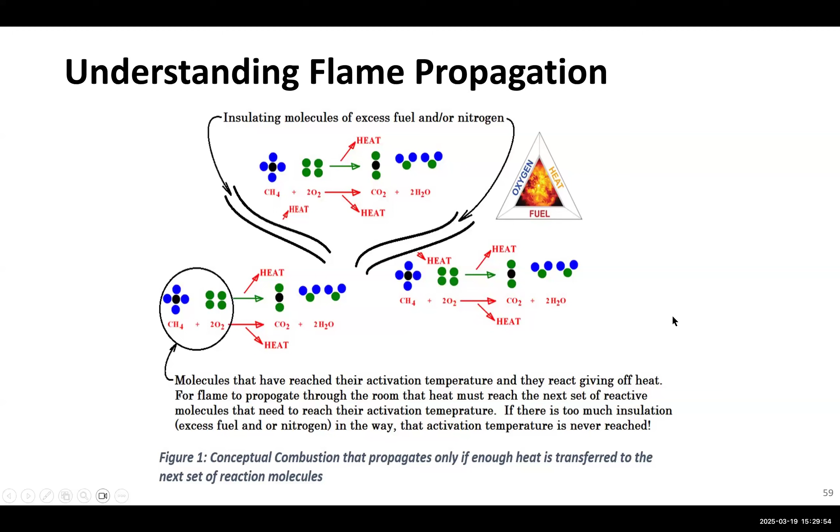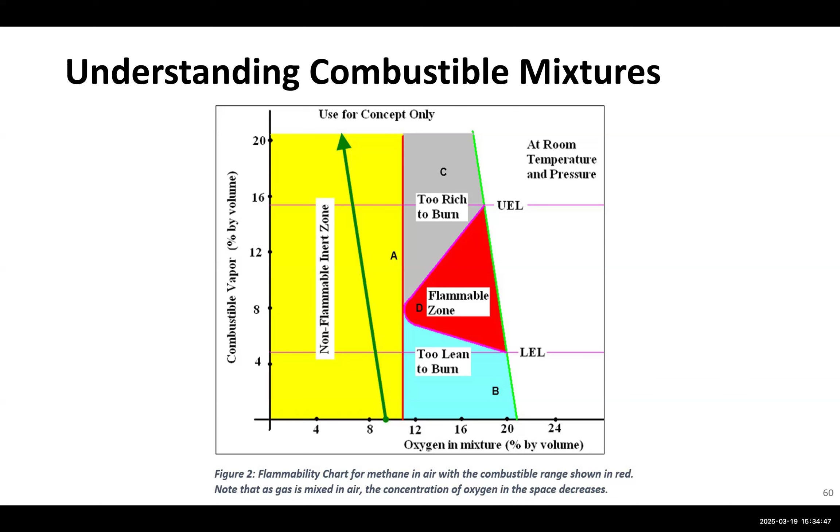Acetylene is also prone to detonation, and has a very, very wide flammability limit. I say that only because, in comparison to natural gas, it's a lot safer dealing with it. Your job as engineers is to ensure that combustible gas mixtures occur only where they're intended to occur - that's in the combustion chambers of boilers and furnaces.

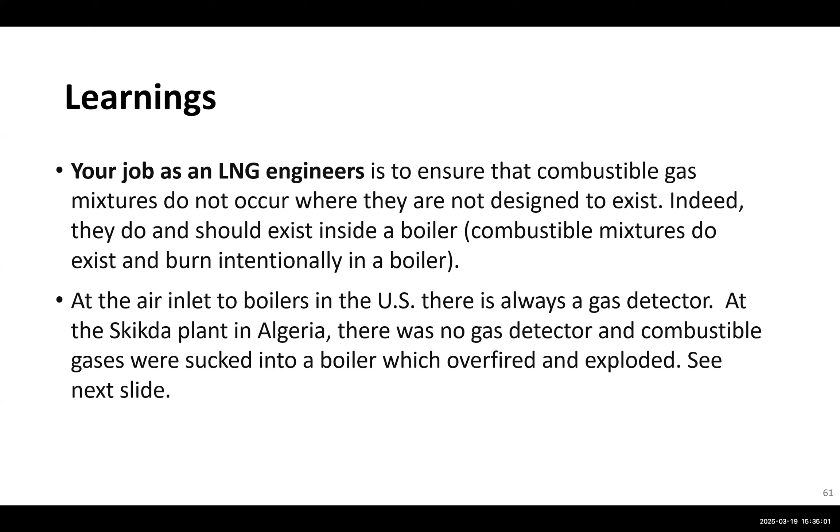Let's talk about safety moment number 20. Here we're talking about tank design, and there are many different types of tank. This is an LNG tank shown here, and in fact I know this one because I used to work at this particular plant - a lot of plants I've worked at over 53 years, especially the last 20, 21 years doing consulting for LNG around the world. Here's a breather tank on this location.

I was going to guess on this, but now I recognize that this is a tank that has an annular space full of nitrogen. Now what's the annular space? The annular space is the space between these two tanks - the inner tank. On a typical LNG tank, the inner tank is an open cup made of 9% nickel steel or of certain alloys of aluminum.

It's not typical to find aluminum in larger size tanks because aluminum gets to be over 3 inches thick, or near 3 inches thick, and it's really unmanageable. So they typically use 9% nickel steel on all of the large tanks.

Typically you have an LNG tank that has an open top, so the gas can get out of here. And typically you have BOG pressure in here, boil off gas, between the inner tank and the outer tank. So if you put a gauge here, you'd actually read your tank pressure.

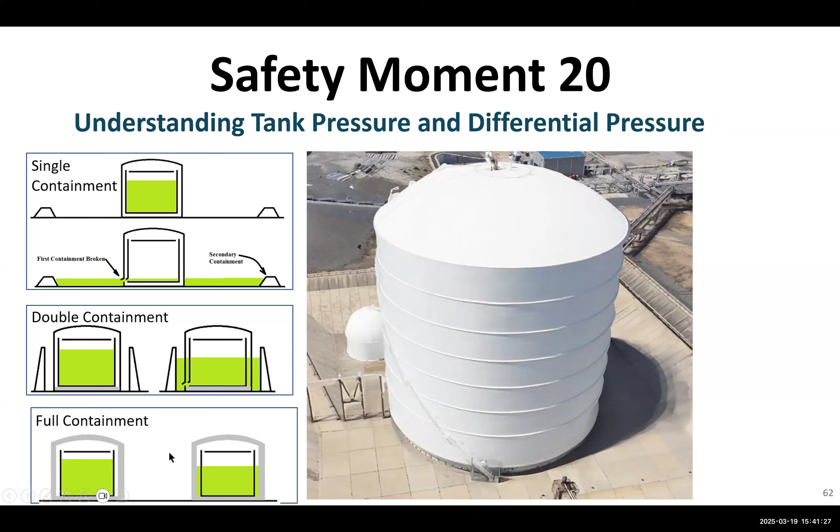But I'm saying in that order of magnitude, this might be 3 times the price of that, just a much more expensive tank. Now, tank pressures are very important. The tank pressure, we realize, is a differential pressure. Let's say the barometer changes, which it does. Here's the barometer at 14.7 psi absolute, that's absolute pressure barometer.

And here the barometer is 12.8, which is the lowest barometer ever measured, recorded at the eye of a hurricane. Here's the highest pressure ever recorded, on top of, this is in Siberia, and that's 15.7. My differential pressure here, which you as the operator would be reading, is continuously 1.3 psi gauge.

Now, that assumes you maintain that pressure. But in order to maintain it, you have to go from here to here. You have to suck out a tremendous amount of boil-off to get you down to 14.1 psi. And here you have to let a lot of pressure build up to get this up to 17 psi absolute.

Now, how does that build up? Heat leak into the tank, that's how it builds up. Or if you get too low a pressure in here, your cover gas is going to kick in. So in order to get this pressure up higher, you have to remove no boil-off, let the pressure build up slowly.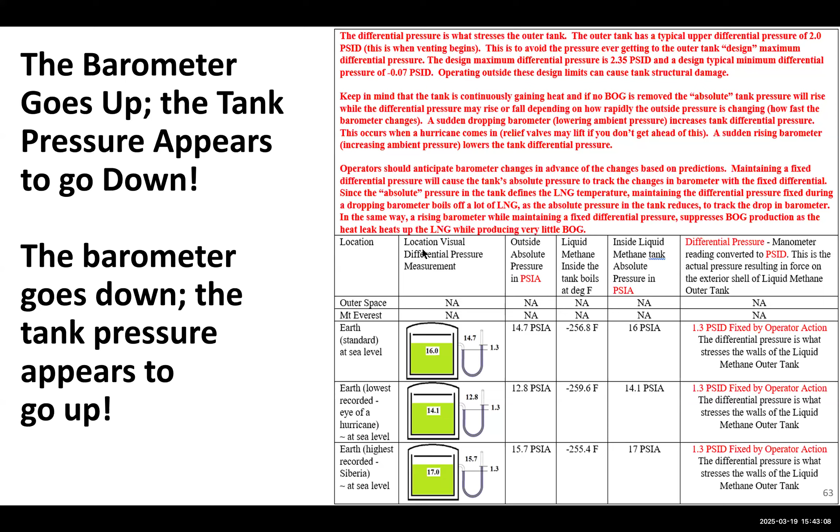So you have to always be looking at what your barometer is for tomorrow. Today's barometer is today, but you look at tomorrow's barometer and take action today to anticipate it. In summary, your job is to anticipate barometer changes and adjust your boil-off gas removal amounts accordingly. If a hurricane is coming in tomorrow, today you start removing boil-off to bring the tank pressure down. If you don't, tomorrow when the low pressure front comes in, you blow the relief valves. Undesirable. Failing to preempt barometer changes can cause hazardous conditions, as well as costly venting of boil-off gas.

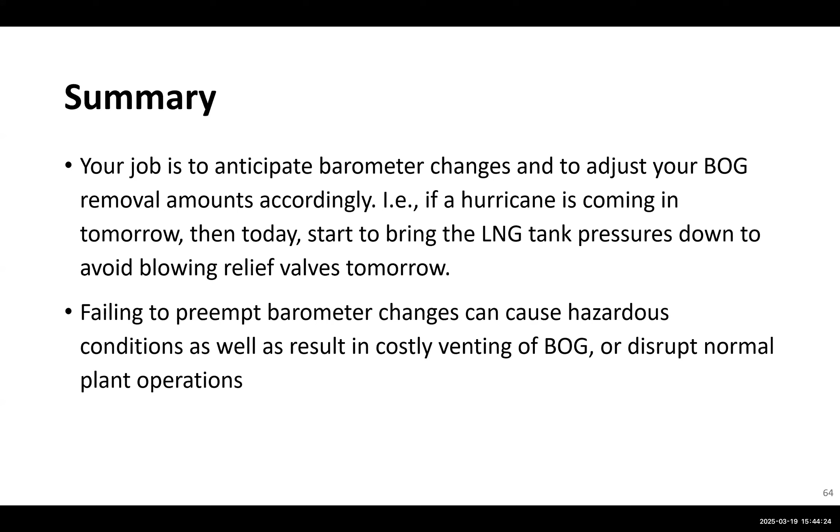Keep in mind, boil-off gas, when it comes out of a tank, is it heavier or lighter than air? Well, it's heavier than air. Why? Because you'd say natural gas is lighter than air, but not at minus 256 degrees. It's boil-off gas, which is very cold, making it very dense. Boil-off gas is heavier than air until it warms to around minus 150 degrees, then it becomes buoyant. At atmospheric temperature, it's about 0.6 times the density of air. So you have to deal with all these issues, knowing boil-off gas is denser than air and will hug the ground.

Safety moment number 21: Frost heave. What is frost heave? It depends on the type of tank you have. Some tanks are held up by piles, with an air gap between the tank and the ground, so you don't have to worry about frost heave there because air flows through, typically 18 inches to 2 feet between ground level and the tank. You get good air movement, and it's typically fenced with chain link so animals don't habitate underneath your tanks. Tanks on piles do not need foundation heating.

However, if your tank is sitting on the ground, think about how it's constructed. You have 9% nickel steel, a little sand, and foam glass insulation, not fiberglass. Then you have your outer tank bottom, then more sand, and through that sand you have heating conduits. Why heating conduits? Because you're continuously pulling heat out from the ground into your LNG, and heat always transfers from the hotter location to the colder location, regardless of how much insulation you put.

So your LNG sitting there at minus 256 degrees Fahrenheit, the ground is always going to be transferring heat to that LNG unless you put something in there that pumps heat in. So you put conduits in there and run electric wires through, and you heat the ground underneath your LNG tank. It sounds counterintuitive because you're putting heat into your tank, but you need to make sure the ground underneath does not freeze.

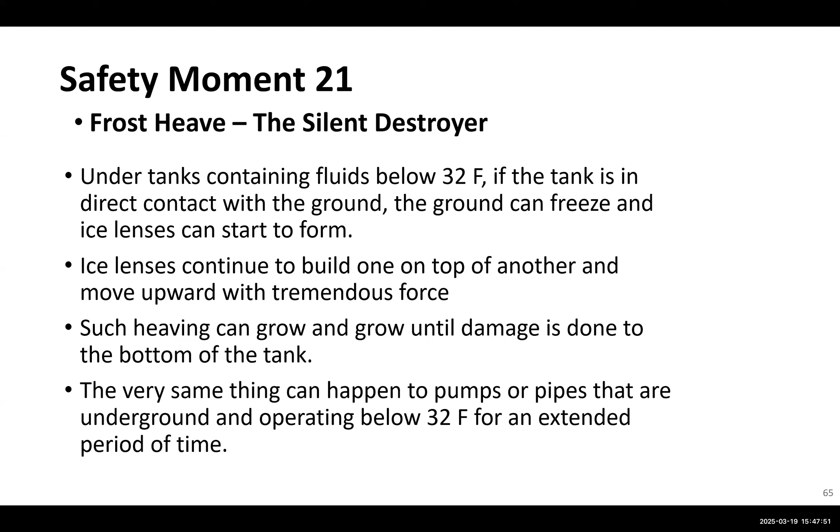You have separate conduits going across, with different temperature sensors in those separate conduits, so you're measuring not the temperature inside the heating conduit, but the temperature of the sand that's underneath the tank.

We talked about this, the maintenance of heating systems. Every so often, if you have one that's operating well, you replace the wiring or at least monitor it and check it for its condition. Let's say you pull one set out and the wiring looks pretty good, the insulation's good, and that's hopefully representative of the rest of the conduits.

But sometimes this wiring can short out, and there have been cases where it shorts out and welds to the conduit. Now you try to pull it out and it breaks, and that weld spot is stuck underneath, and you cannot stick additional wiring through. That is a problem. So what you have to do is take the conduits next to it and make sure they have additional heat so you're able to account for that missing conduit.

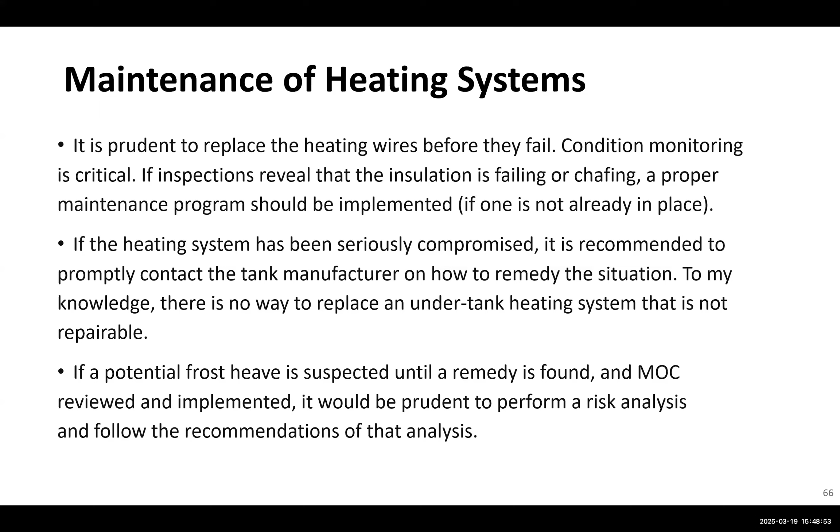Also, another way to handle it is you send in a heat tracing wire in both directions to the point where it stopped, and heat that way so that to the extent you can, you replace the heat that is needed in that area.

In summary, for this event, your job is to monitor the system, to coordinate with management, engineering, maintenance and other stakeholders on the status of your system. If you find out the operators are not keeping the heat tracing system operating appropriately, you have to take action because you can end up with a damaged tank. And that's the most expensive part of your plant.

Now, most of the plants in operation in the United States today were built between the 1960s and the 1980s. So these tanks we're talking about are more than 50 years old. They're probably grandfathered, which means you would not be able to replace them today if you had to. Very serious condition.

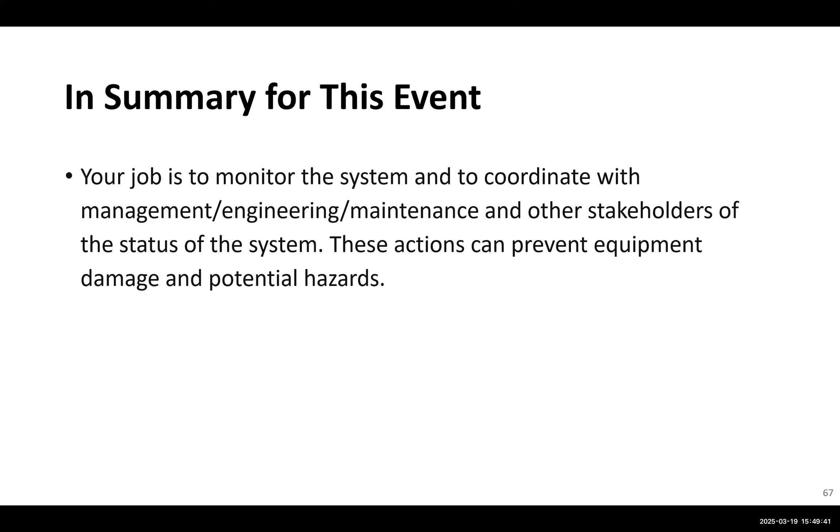Safety moment number 22. One man died and 5 men were injured. And this is the one I told you about when my boss was killed. In this case, what failed?

Lack of lockout tagout. The job was well planned, except for lockout tagout. It was well executed, except for lockout tagout. And the end result: one person died, 5 people were overcome by a nitrogen gas mixture, mostly nitrogen initially, but then gas followed. Let me explain what happened.

This was a 48-inch diameter gas main, large diameter. The main was shut down properly with all the proper valves closed, etc., but without lockout and tagout. This 48-inch main was maintained at 6 inches of water column pressure, roughly a quarter of a psi. Bags and stoppers were put in at this location, with a vent hole in between.

Being this was a 48-inch main, the size of the stopper hole was a 6-inch diameter threaded stopper hole. I used to be familiar with the types of machines used to drill and tap those holes. At any rate, this was a cast iron main. At some parts, it was an inch and a quarter thick. That's how big this main was.

In fact, to cut this out, we had to use plasma arc torches. How do you cut a 48-inch diameter, inch and a quarter thick piece of steel? In some areas it was an inch and a quarter, more at the fittings itself, up to an inch and a half.

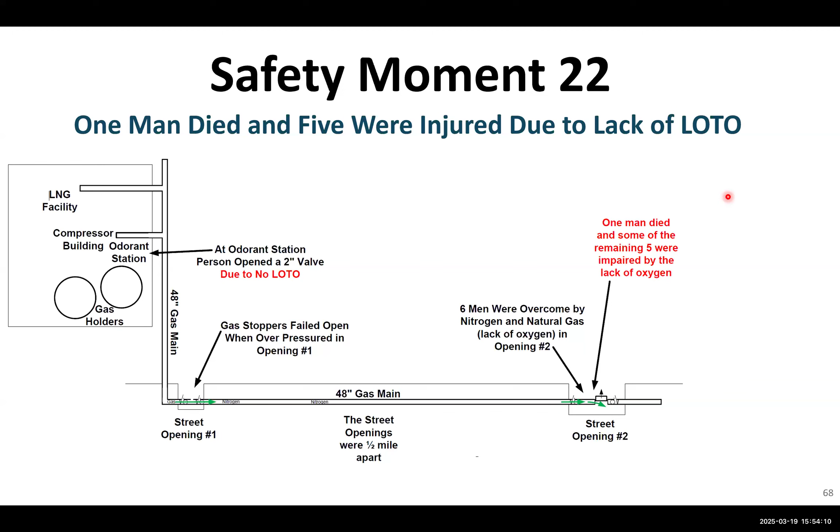Lockout tagout is one of the things. When I go to a fire watch, I ask them, do you know how to use that fire extinguisher? Explain it to me. You always got to be ready to go after all of these things. Lockout tagout procedures should be incorporated into every procedure where it's appropriate.

Besides lockout tagout procedures, continuous air quality monitoring for any locations where nitrogen or gas could become an issue is needed. Anytime you go into a confined space, oxygen monitors must be used. Training on responding to a lack-of-oxygen incident is very important.

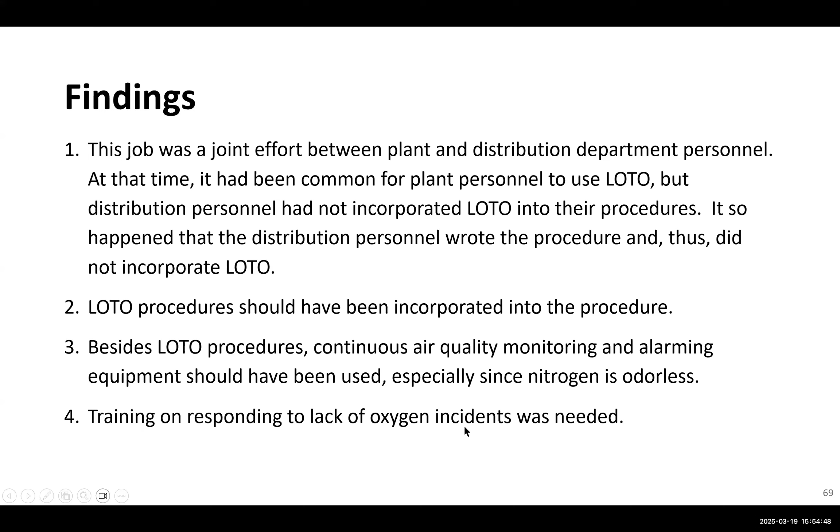Conclusion: lockout tagout must be used on all jobs where valve positions must be ensured. Where risk of asphyxiation exists, continuously monitoring and alarming equipment should be used. Where risk of asphyxiation exists, harnesses should be used on personnel to pull them out of the opening if necessary. Self-contained breathing apparatus should be available to personnel. All gas operating personnel require training on the effects of lack of oxygen.

One of the effects of lack of oxygen—let's say if you're in a marginal area of lack of oxygen, 19.5% is the OSHA limit. You cannot go into a place with less than 19.5%. But at 16% oxygen, you get very fatigued and your mental cognitive ability gets impaired, so you make wrong decisions.

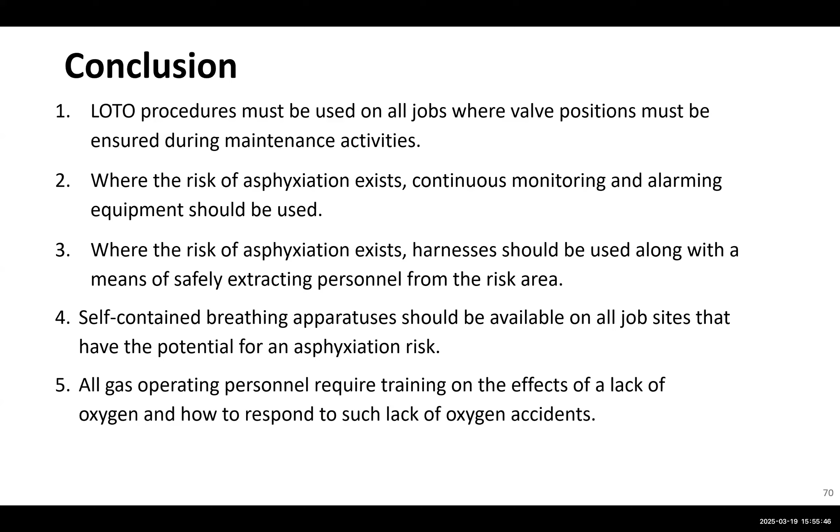Very critical that that does not happen. Here's another safety moment. This is where two men were killed. Two men died and others were injured. What happened was procedures were not followed.

It was typical when you had a gas main installed to put a cap on it and pressure test it to 100 psi. This crew was used to operating with six-inch diameter gas mains, which has a very minimal amount of force on it.

Think of it this way: six-inch diameter, three squared, that's nine times three. Nine times three is 27 square inches, times 100 psi. That's 2,700 pounds of force on the cap. Not a heck of a lot of force.

Get up to 24 inches. Now it's 12 squared, that's 144, times pi, which is roughly 3. So now you're talking about 450 square inches times 100 psi. You're talking about like 45,000 pounds of force. The welders were supposed to put 7 inches of weld material on these straps.

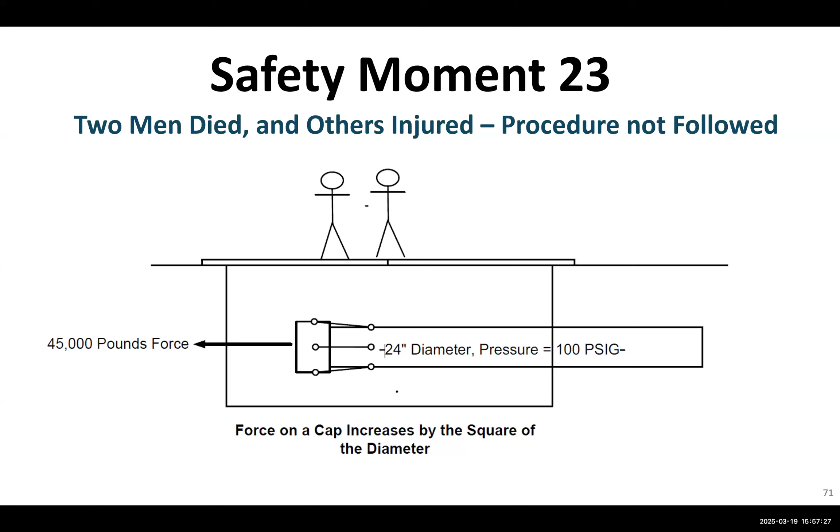Over the years, they got lazier and lazier, and I shouldn't accuse them of being lazy, but they didn't realize the importance of all this weld material. Instead of going all the way around the straps, they went only on two sides. Over time, instead of three passes it became two passes, then one pass. Eventually they were almost tack welding these on, maybe not quite tack welding, but not putting enough weld material. The cap blew off, and the two people standing on top of the plates were killed.

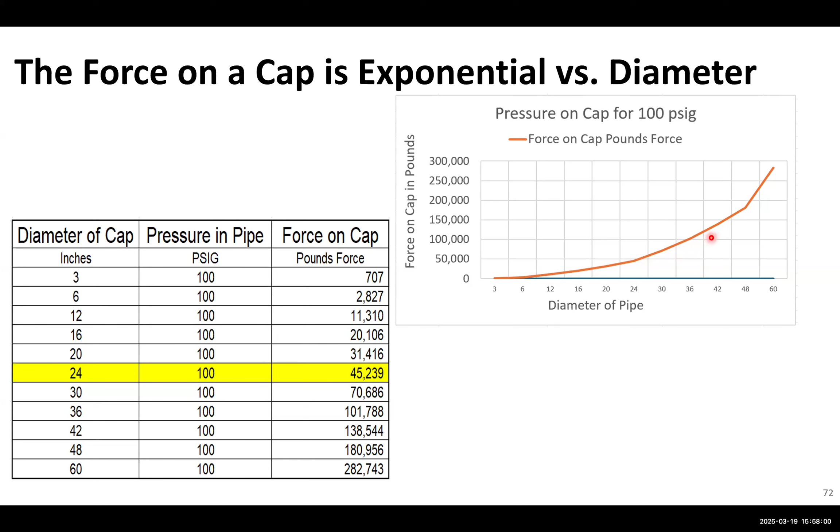Now, I said before, 24-inch gives about 45,000 pounds of force. Whoops, go back one - six-inch, 2,700, approximately, since I used pi as 3 instead of 3.1416. Take a look at how dramatically the pressure changes by the diameter. It's not linear, it's exponential change.

Conclusions: accidents are avoidable. Had the welders followed procedures, this accident would not have happened. After that, we eliminated the use of all dresser caps and welded everything.

We should expect cold weather every year. The engineer reports to the chief engineer, and I was the chief engineer. We had 274 customers lose gas service this morning, and I asked why. He said, well, it was cold out. I said, that's not an acceptable excuse. It's cold every year, we design for the coldest design hour. It is an unacceptable excuse to lose customers because it's cold out. We should engineer that out of our system.

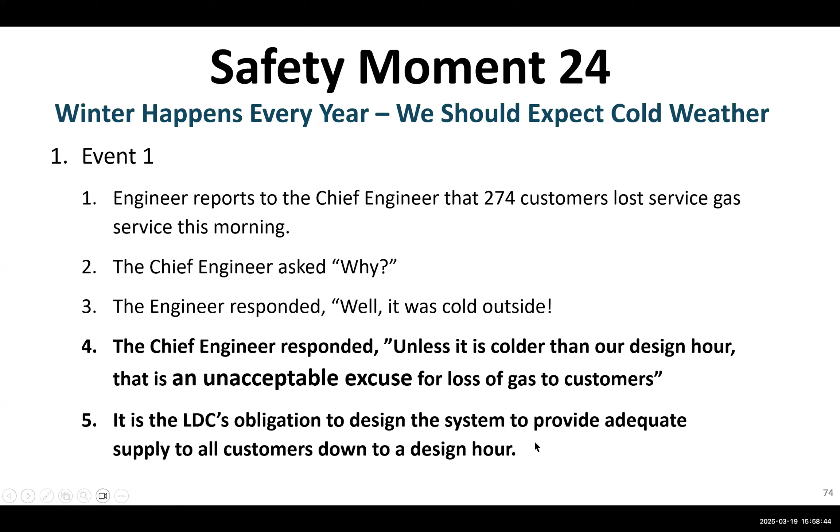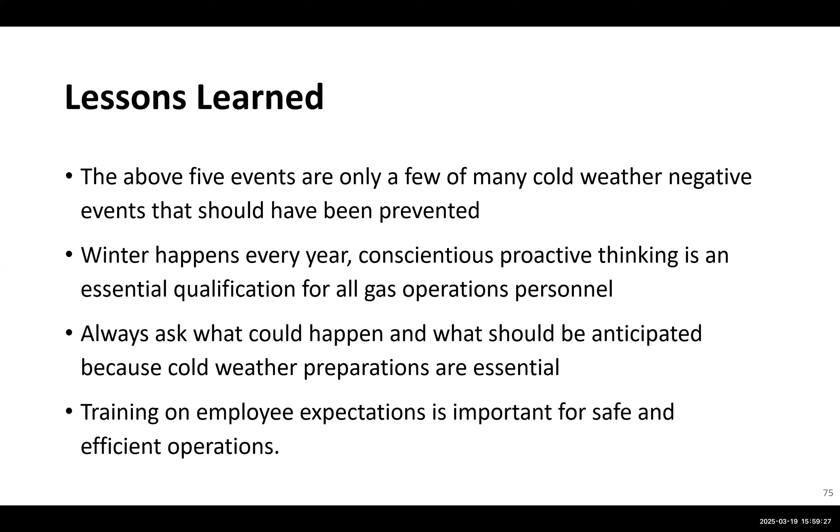The lessons learned: there are five events I spoke about. One is that an operator and an engineer got up, and I raised my hand and asked, have we identified all the low pressure areas? He said, yes we have. I said, what I asked is have we accounted for all the low pressure areas? He said, yes we have. I felt good. Afterwards I asked him, what does accounted for mean? He said, it means we know where they are. That's not acceptable. I had to contact everyone at that meeting and tell them we have low pressure areas that have to be repaired.